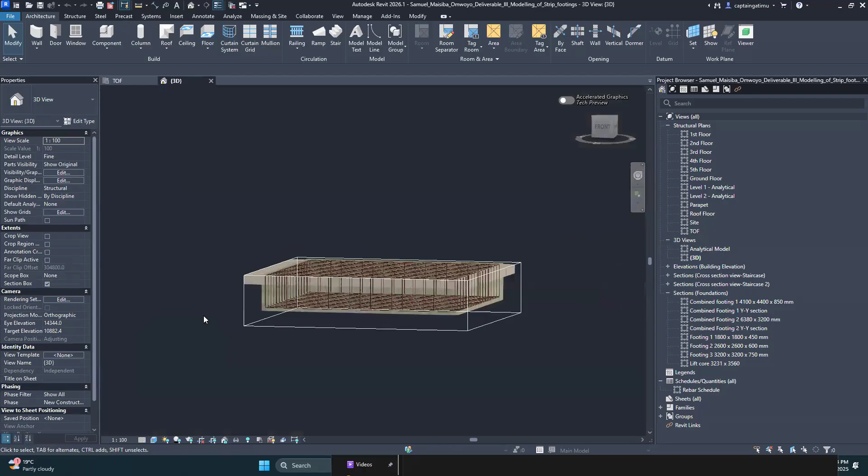Okay super, so this is what I want us to do. At the moment, we only have the structural model that we have all modeled, all right? So I can see some of us have already been able to create this section box. I want us to do this simple thing, I want you to be in a situation where you can visualize the entire structure in 3D.

If you had used the section box and you have been unable to go back into the entire 3D model, you can be in the 3D view first, press escape to ensure you have not selected anything. Then in the properties tab under extents, there's this section box, uncheck it, and your 3D view will reset back to the defaults. So this is what you're going to have.

Then after you have this, now we can link the IFC file. So we said the IFC file is an Industry Foundation Class. It allows you to move information or transfer information from various software, and it's a standard class that can be opened in all BIM software.

So it means you can move your data from Revit to another software that is not made by Autodesk. You can move data from, say, ArchiCAD, Tekla, ETABS into Revit as well using the IFC files.

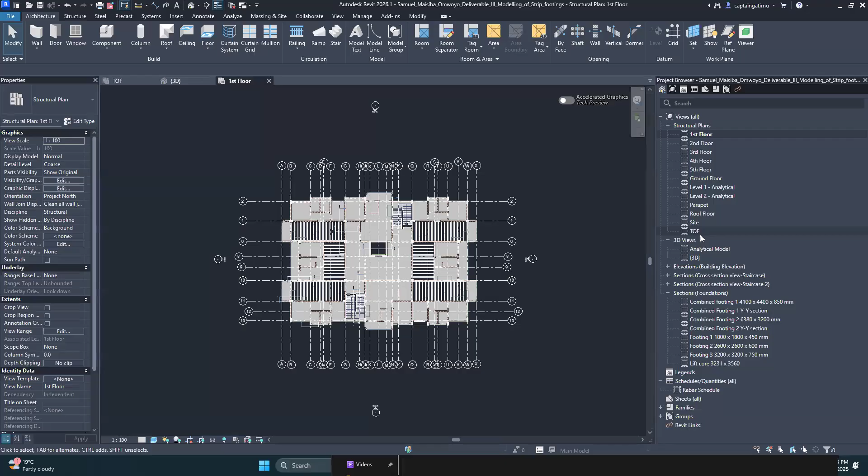All right, so with that done, linking the file should be easy. All you need to do is go to Insert, as we did for the PDF and CAD files before, then click on IFC file and scroll to where you have your file stored. If you don't know where the IFC file is, just use the link from which you downloaded the PDF files and CAD files; you should be able to find the IFC file there. So go to where you have yours stored, click on the IFC file and open it. At the moment, leave everything as default and give Revit a moment to load.

As you import this IFC file, take note of one thing: it is going to make your model really heavy. So I recommend that you just link it, move it to where we want to move it, and once you are able to visualize your model, unlink it from your model.

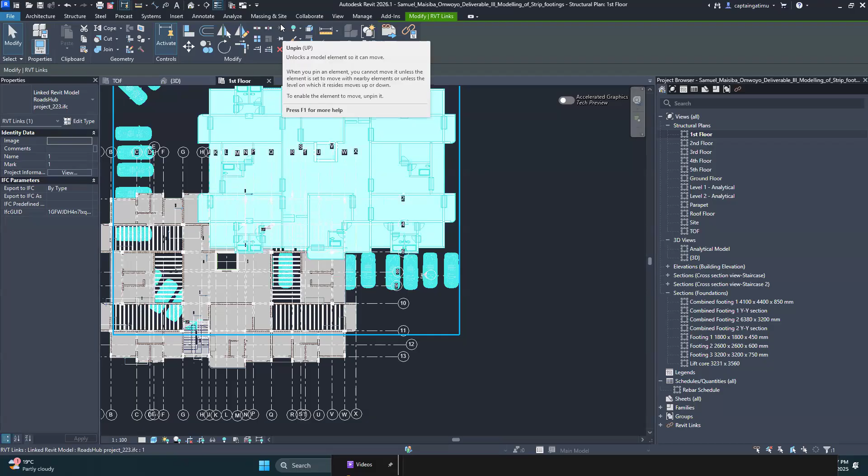After you've opened it, you're going to notice that it has not been placed on top of our floor plan as you would wish. So what I want you to do at this point is select the file itself. Remember, your software is going to be a bit heavy at this point, so just work slowly. Select the file itself and ensure it has not been pinned. If it has been pinned, you're going to have the option to unpin it, but if it's not pinned, you cannot unpin it, and this means you can move it. So move it by this corner here, and move it so that it flushes with this corner right there.

Okay, once you have your IFC file lined up on top of your floor plan, you can now go into the 3D view and be able to see how the architectural members are interacting with your structural members.

So in this situation, if you do not want your walls going excessively outside, you can take note of that and be able to change the position of your wall so that you can have what you need.

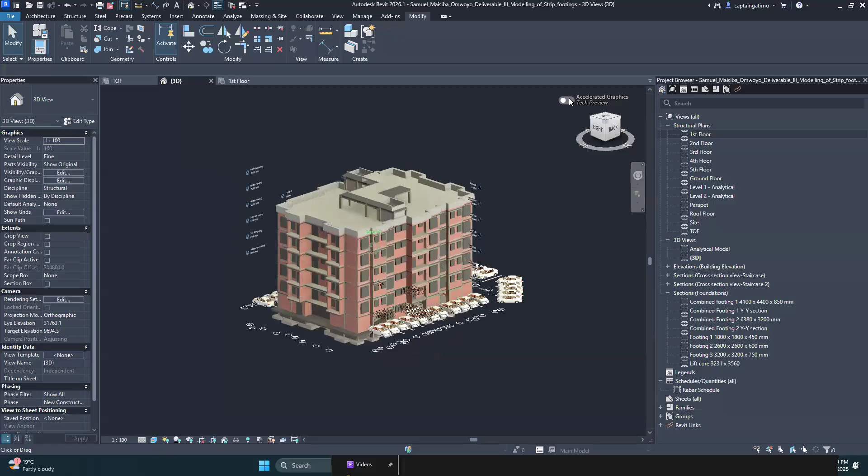Okay, so you can see the areas where we have modeled our cantilever slabs or our balconies, and you can see they are where they should be. So this is what you can generally use an IFC file for.

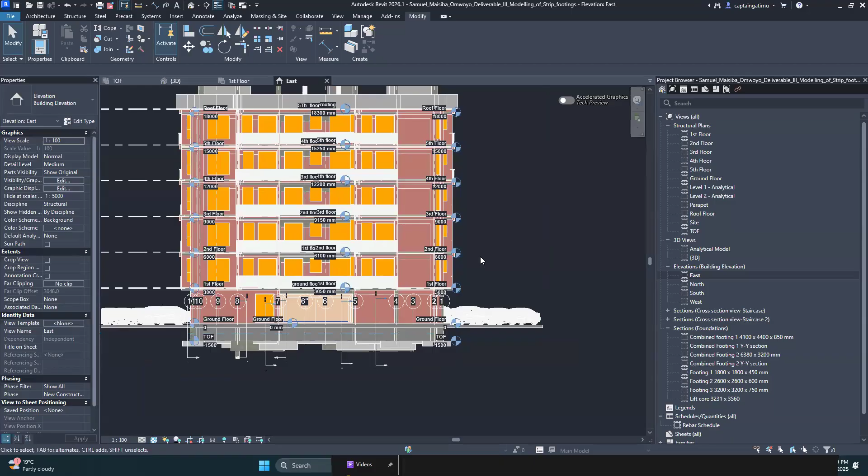You can be able to confirm any errors before you proceed. So if you go to an elevation view, take note of a few differences you may be having between your architectural model and your structural model. You must note that the levels vary a bit, but that is no cause for concern at this point, since we changed the levels as we were doing our work, and that's good enough for us. But in the eventuality that your levels vary by a big value, you can take note of that error and correct it before going further, so that you can save your energy and time later on.

All right, so you have this. This is how you do it, and I think it's pretty easy. So you can be able to model it and get to see how your members interact with the architectural elements.

All right, so I'll close this project and then open a project that I'm going to be using for today's demonstration. So just give me a moment as I close this and open a model that I'm going to use.

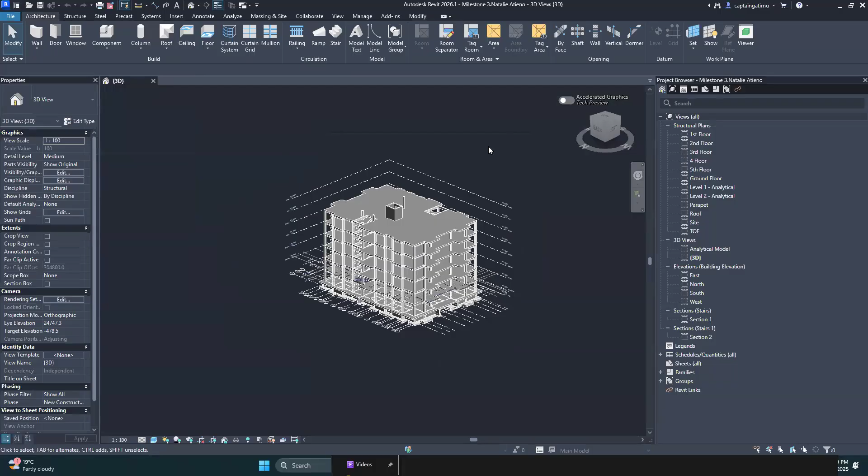Okay, I forgot to show you how to unlink it. So I'm going to do that again so that you can be able to unlink it as you work on it.

So we're going to re-import the IFC file in this model as well. We are going to go into the Insert tab, go to Link IFC, select the IFC, and click on Open. Give it a moment to load, and you'll have your IFC file within your model. You can change the graphic display option to shaded or realistic so that you can visualize it better. Then select your IFC file and use move to move it.

So I'm moving it by this corner and moving it to this corner here, so that it fits perfectly there.

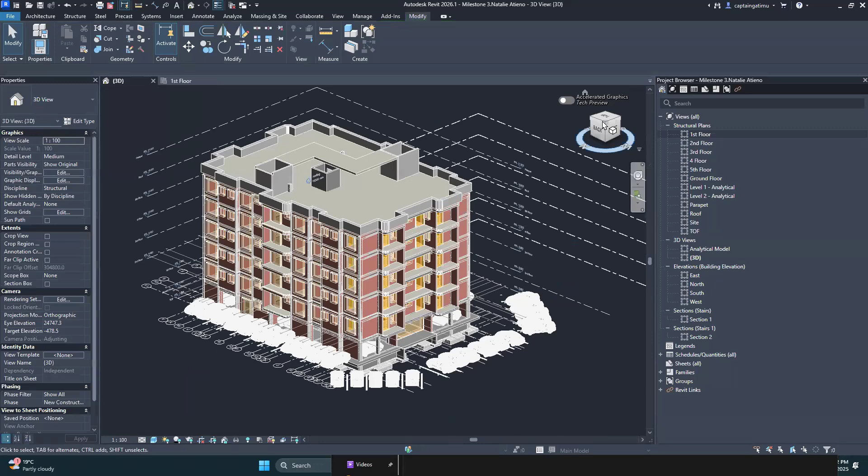Then after you do that, you can go to your 3D view and just have a view of how your members are interacting with the architectural members. For example, you can see here this should be the opening into the parking lots. So if you had a column here, you can tell that that system will not work for this particular design.

In the eventuality that you have linked your file into Revit and now want to remove it so you can proceed with other works, this is how you do it. You go to Manage, then Manage Links. Once you are here, you can see all the files that you have linked into your project. You just select it, right click, and unload.

I'll repeat that. Once you have had a good visual check to see how your structural members are interacting with the architectural members, you can unlink the IFC file. What you do is go to the Manage tab, then Manage Links, and at this point go to the IFC file - this is what we are interested in. Right click and then unload. Click on OK, and you are good to go.

Then also we do not need the CAD file at this point, so we can unlink it in the same way. You just right click on it and then unload it.

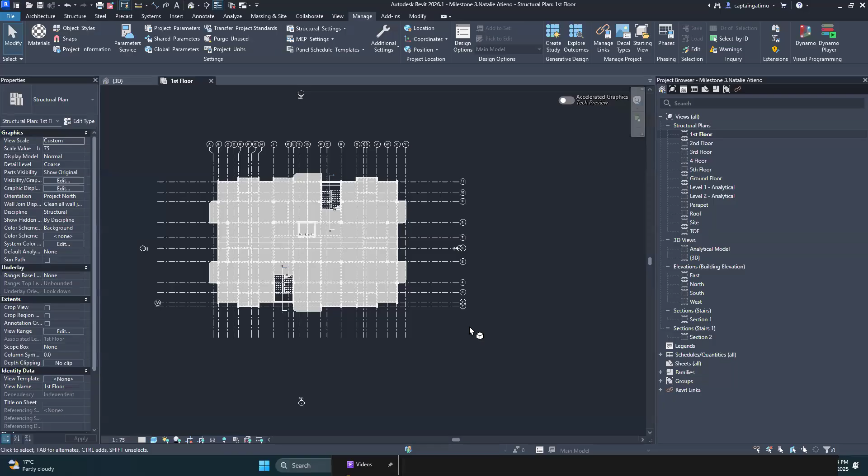After you have done that, you just close and you'll notice it now disappears from the model itself. Also, the CAD file that we had in our model has been removed. So that's how you are able to link files into your software, and that's also how you unload any links or linked files from the model if you do not need them.

Okay, so let's proceed. The next bit will be to create filters.

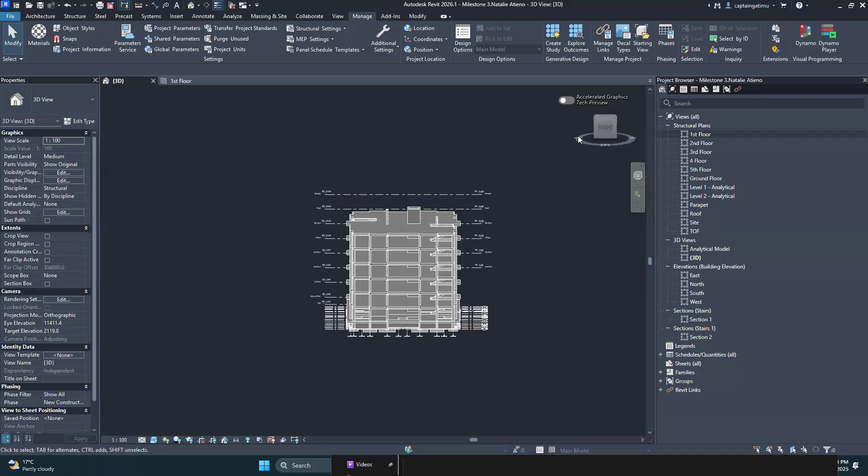So at this point, by modeling this structure, we have different cross sections of columns. We know we have 4 cross sections, but by looking at it from afar, we cannot tell where our column ones are, where our column twos are, where our columns threes are, where our columns fours are. We are not able to do that. But it would be good practice that as you look at your model, you are able to tell where a particular family is, so that if there was an error during modeling, you would not expect your column 4 or column 2 to be here as per your design - you can make those changes earlier on before you proceed with other works.

Okay, so this is how you create filters. To create filters, I'm going to take you back to the visibility settings that we have used before. The visibility settings are: one, settings that affect whether elements are visualized or if you cannot see them in Revit. Number two, they affect how elements are seen or visualized in Revit.

So these affect the cut patterns and the colors of the members themselves, and you're going to be able to see that. For some of you, your staircase are probably not visible in the 3D view.

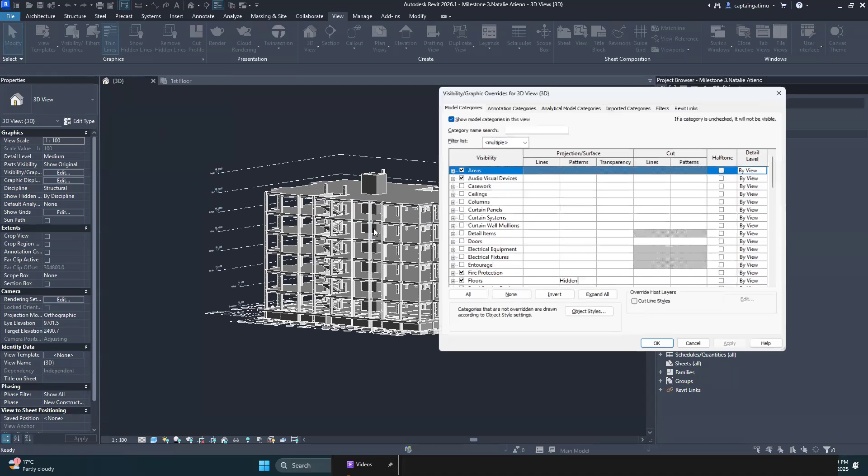So we are going to go to the visibility graphics. We said you could go to the view tab and click on visibility graphics, or you could just type VG and the visibility graphics dialog box will appear. Our interest is now in creating a filter, so we go to filters over here, and once we get to filters, we are going to create a new one.

So how do you create a new one? This is how: you go to edit/new at the bottom, left click on it, and then in the filters dialog box you get to this new icon. It looks like a page folded at the top right with a sun icon to its top left. Click on this and you are prompted to name your filter, so we could call this 'column one,' and then click OK.

After naming your filter, you need to set the rules that affect how your filter works. To understand what this filter is, you need to understand the visibility graphics - settings that affect whether an element is visible or not, and also how a member is visualized in terms of color, cut patterns, etc.

Once you have your filter created, the 'column one' here, you go to the filter list. Since all members we are working with are structural members, you can uncheck architecture and ensure you are remaining with structure only. Then scroll down and look for the columns.

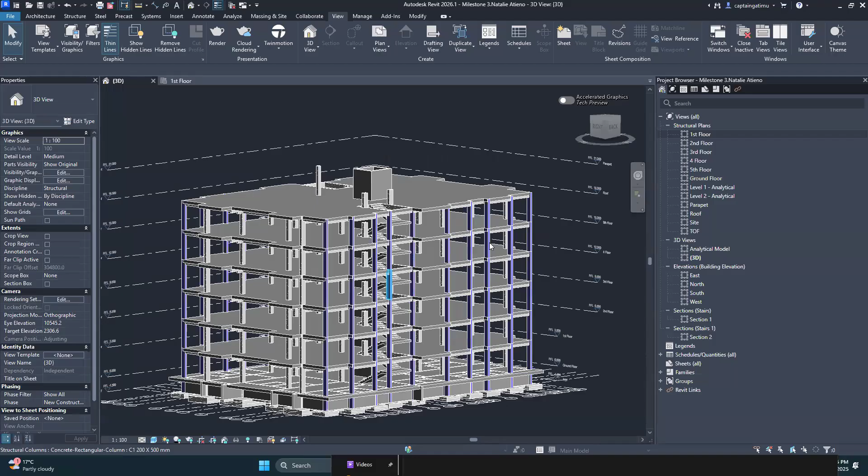From this view, you can tell that all our column ones have been given a specific color. So if you are working on your model and you have color-coded elements, you can tell which elements you are looking at. So if we had modeled a column one at an undesirable location, we can tell that earlier on, even before we get to the next part.

So I'm going to create filters for the other columns. To create filters again, we go to visibility graphics, and then under visibility graphics, we go to filters. Then to create a new filter, you click on edit, new. Then you add the new filter here. You give it a name first, so this is going to be column 2.

After you do that, now you have to select the category. The column is under structural columns, it's a structural column. So check structural column, and then you get to set the rules. We are using the type name. For this one, it has to be equals to, because it's a specific cross-section. Then you select the column 2 cross-section, C2, click apply, and OK. Then you add it, column 2, add it, and click OK there.

Then go to patterns, click on this override rectangle here, change the foreground pattern to solid fill, and enter a color of your choice.

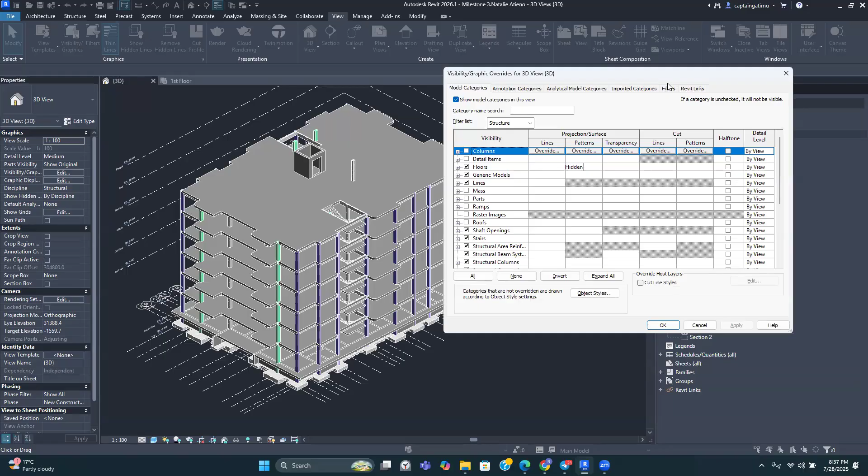I'm going to do the next one for column 3 and column 4. I'll be a bit faster on these two. To create the filters for column 3 and column 4, I'm going to show you a new trick.

Go to filters, then click edit, new. At this point, you're not going to create a new one. Rather, we're going to copy one. Go to one of the column filters we created, right click, and duplicate it. After duplicating, just rename it, call it column 3, then click OK. We don't need to select the category since it's a duplicate, it's already selected from our previous selection. Now go to the filter rules.

We don't have to do a lot here. All we need to do is click the drop down and select column 3. Click apply and OK. Then add it, column 3.

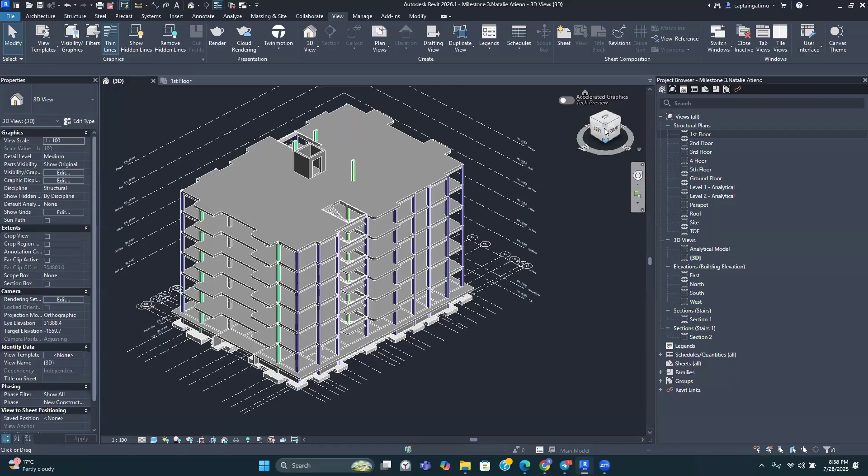You can change the pattern as we did earlier. The pattern foreground should be solid fill, and the color, select a color of your choice. I don't know what to go with, I'll just go with that. Click OK, apply, and OK. By doing that, you can see where our column threes are.

But the colors I chose for column 2 and column 3 are not easily differentiable. I'd recommend you go with colors that you can easily tell apart from each other.

So we continue: visibility graphics, filters, edit, new. We're going to duplicate this one more time. Let's rename this now, we rename it to column 4. Click OK.

Then just change the value to column 4. Click apply and OK, and then add it. After you add it, you change the pattern. Go to pattern override, change the pattern to solid fill, and then the color, you can change it to a color of your choice.

Which one do I go with? I'm going to go with this. Click OK, OK, apply, and OK. By doing that, you can see where your column fours are, and I think they are where I expect them to be.

The beauty of this is you can do this for all the members in this model. You can do it for the foundations, the slabs, the shear walls, the foundation walls, and the stairs as well. So I'm going to show you two more, and then we'll share videos to guide you on how to create filters for the other members.

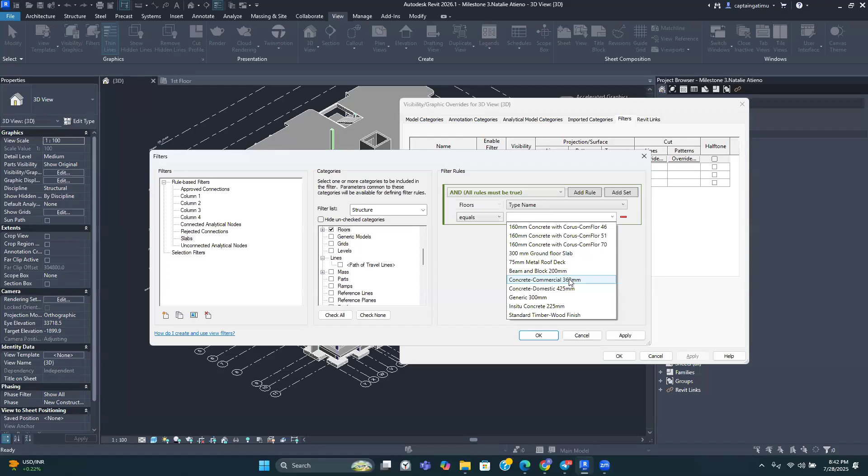Okay, so I think this poses a good challenge. If you are unsure about the names that you created or the type names that you used for your structural members, this is what you should do. Just click on apply, click on OK, click on OK again. Go and select one slab, and get to see which type name you used. So if you select one, go to edit type. This is what you are calling the type name.

So you can be able to see even errors that may arise. For example, you can see that Natalie used the same slab from the ground floor to the roof level, which is not ideal. So what we can do at this point is select this slab, go to edit type, duplicate it. Let's call it the 175 mm RC slab, and click on OK.

Whoever that is, Oliver. Okay, so just change the thickness to 175, click on OK, and you are good to go.

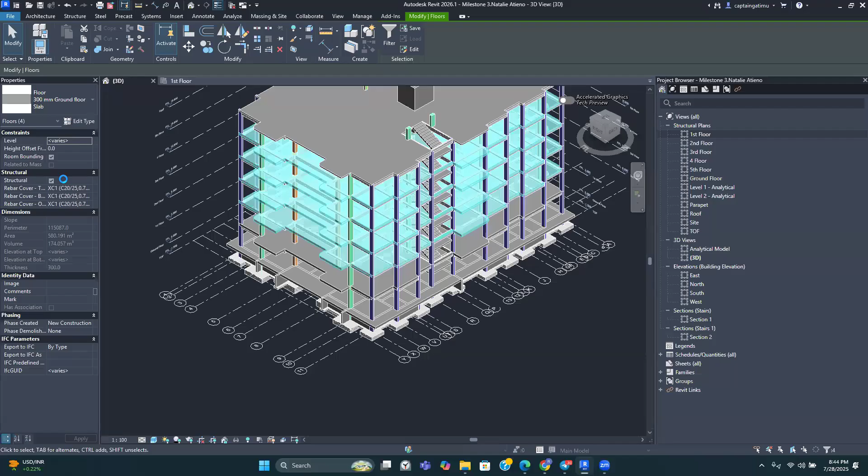So I'll want to show you something here. I'll just change a few over here, probably to that point. Then click on this properties tab and select the type name that I want, and then let Revit do the rest for me.

Okay, then I'll go to visibility graphics, go to filters, edit, new, and select the slabs. Go to filter rules, ensure first the category is under floors. Then in the filter rules, we're going to use the type name as the parameter, equals as the operator. And in the value, we are going to select the type name that we just created. Click on apply and OK.

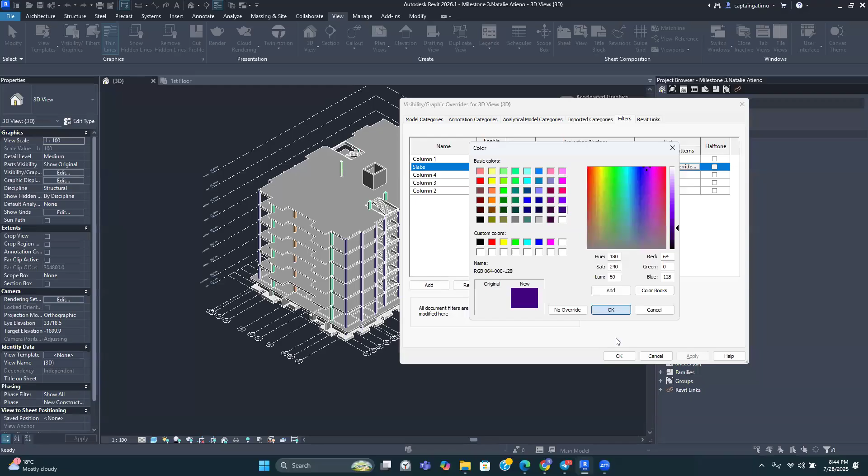Then I want you to see how this would help you identify errors earlier on. So if you were to give this a color, solid fill, let's give these a different color. So which color do I go with? I'll go with this. Click on OK, OK, apply and OK. That's too bright, don't pick that color please.

So you can tell that this floor is suspended, but it does not have the same type name as the other floors. So there must be an error here. You can visually tell that there is a family that is not at the right place, or it is not where it's supposed to be. This is why we work with filters, just to enable us to have a visual look or visually understand our structure better.

So I'm going to create the last one for the walls, and then I'm going to leave the rest for you to create, since they follow the same workflow. All right, so I'm going to go to filter. I want to create one for the walls. I'm going to click on edit, new, and create a new one here.

I'm going to call these the lift core walls. Okay, the lift core walls. And then under categories, you have to scroll and look for structural walls. You are going to find that there are no structural walls, just as there were no structural floors. So you will just select walls, scroll down and select walls.

And then in the filter rules, remember in the parameter we are using the type name. We are using the type name for now. And in the operator, we use equals. And in the value, we are supposed to use the lift core walls, or whatever name you gave yours. So I'm going to select the lift core walls, click on apply and OK. Then I'm going to add them, lift core walls, click on OK.

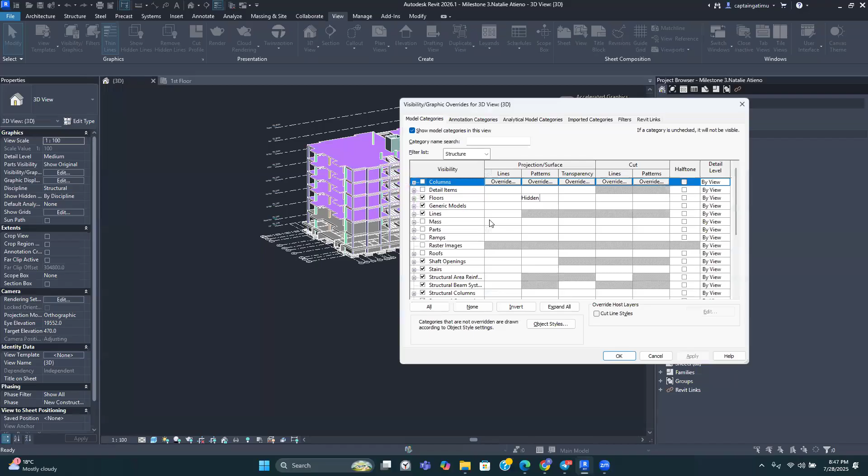All right, so that's how you create filters. And this is what they allow you to do. If you have filters, you can single out one element. So if I'm only interested in seeing my column ones, I can uncheck everything here. And if I had a filter for every element, I can uncheck all the other elements. I can turn off their visibility, click on apply and OK, and I'd be able to see my column ones only. If I wanted to do the same for the beams, you can do the same.

I hope that was understood. If you got that concept, please type a one. Let me know we are together.

Super. I can see most of us are flowing really, really well.

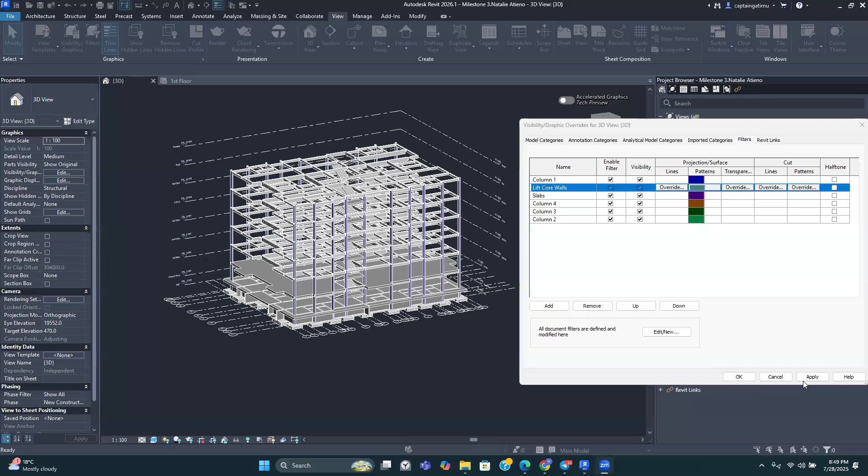So we are going to go back. In the eventuality that you have turned the visibility of some of the members off and you'd love to visualize them, you just go to visibility graphics again, filters, and check these checkboxes. Click apply and okay, and your members will reappear again.

So those are some of the things that we use to make our work easier in Revit, especially when working on larger projects that might be a little complicated to work with when visualizing everything in one view.

And the beauty of this is it will also be applied to the rebars, especially when you get to modeling rebars for the slab. We are going to create filters for each layer, be it the bottom ones, bottom twos, bottom threes, the top ones and top twos, so that when doing our annotation it becomes easier. We can work on one set of rebars first, then once done, turn it off and shift our focus to the next set, ensuring it's easy on our eyes to work on.

So with that, we are going to go to a new concept, and the new one we're going to be working on is modeling the rebars.

But before I go there, I wanted to challenge you guys. I know at this point you have enough knowledge to model the parapet level. We just need a floor, the columns over this section to cover the staircase, the shear wall itself, and this other staircase. I know at this point you have the knowledge to do that. So I am hoping you will take that as a challenge and model the parapet floor on your own.

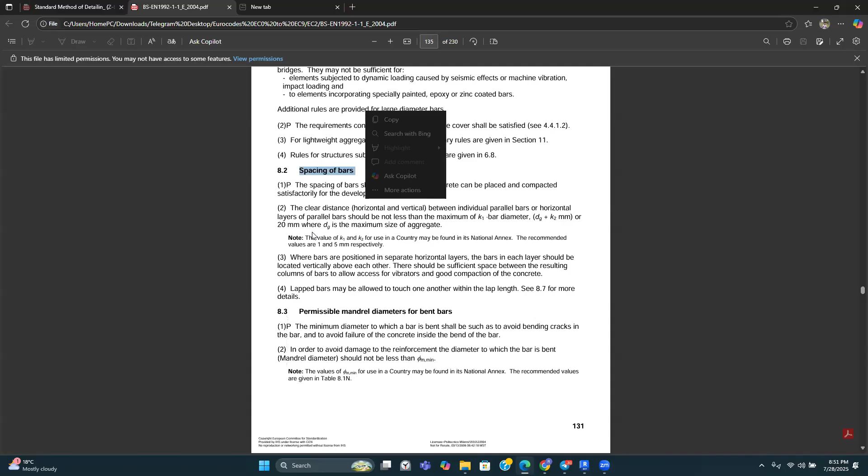And the most important thing you're going to be reading here is about the spacing of the bars. We are not going to, at this point, focus on what the annotations should show. Once we get to annotation, we are going to be able to do that. So what I want us to do is just get to see the guidelines specified for the spacing of bars in individual members.

The spacing of bars shall be such that the concrete can be placed and compacted satisfactorily for the development of adequate bond. This means once you pour your concrete on site, you can compact it - the vibrator can go through the different layers of bars so that you can develop the adequate bond between concrete and the rebars themselves.

Sometimes you're going to find structures that have too many bars, and you're not able to meet the minimum spacing between bars, which typically should be equal to your largest aggregate. So if your largest aggregate in your design mix is 25 millimeters, it means at any point when doing your design calculations, you should always ensure that the minimum distance between any two bars is 25 mm.

If you do not meet that requirement, design-wise, you'd have to come up with a different design, probably work with a higher class, or even go for some novel solutions, like self-compacting concrete, but that would be really expensive. So you have to balance everything to keep it economical.

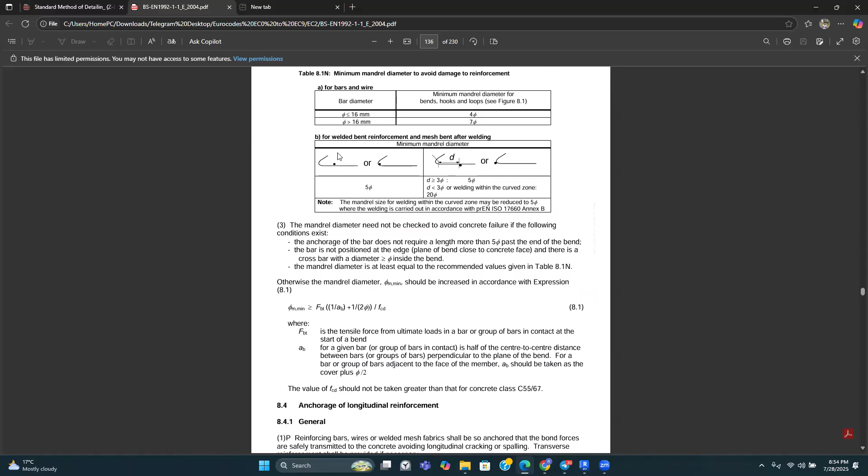The other important thing we have to look at is the bending diameter, since we are going to be bending our bars. Looking at the standards of detailing, this typical cross section has a bend here, and the diameter of that bend is what they refer to as the mandrel diameter.

There is a minimum diameter you have to use. These are not things you'll definitely measure on site, but it's good to take notes so you ensure you do not degrade your rebar while cutting and bending on site. For any bar diameter less than 16 mm, the minimum mandrel diameter for the bend must be 4 times the diameter of the bar. If the diameter is greater than 16 mm, that bend diameter should be greater than 7 times the diameter.

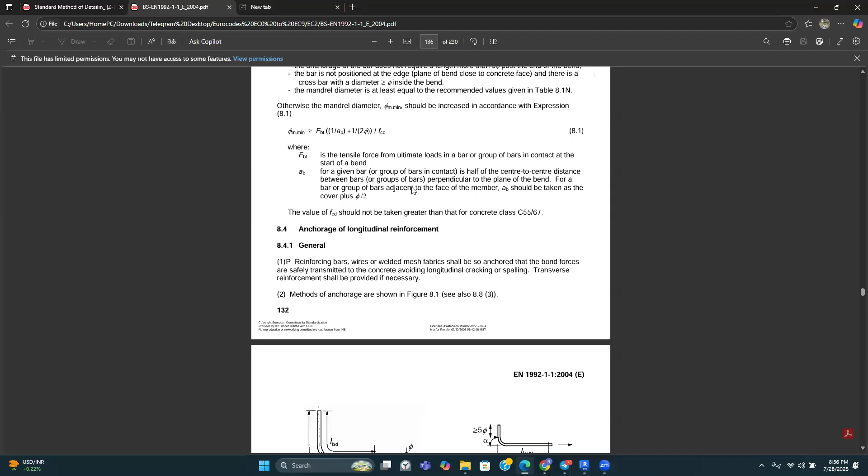But again, this is not something you'd really need to be keen on at site, because it's relatively easy to achieve. So that should not worry you at all.

The other one is with regards to the length of the hook, since we are going to be creating hooks for our bars. For the 90-degree hook we're going to use for our foundations, this length above the mandrel should be at least 5 times the diameter of the bar, so greater than or equal to 5 times the diameter.

So if you are using a 12 mm bar diameter, this length should be at least 60 mm going upwards. If you are catering for this length as well, it would have to be relatively greater than 60, just to be safe. So we are going to use that information.

At least we now have a background, and we are going to start modeling the rebar, beginning with the foundations, just to start off, because this offers a softer launching pad. As the course continues, you'll move on to more complex members to model rebar for. We are going to work in the top of foundation, starting with the easiest one, footing 1, then proceed to the other footings and one of the combined footings together, and we'll provide recordings for you to do the other one as practice, as part of the milestone.

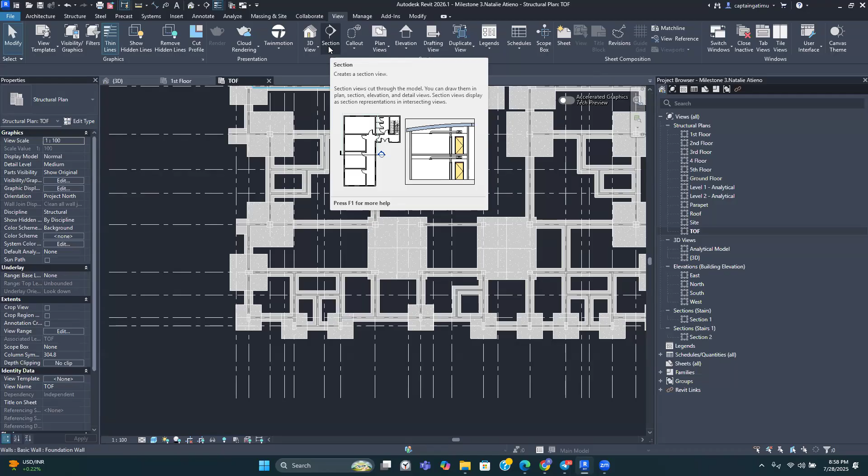So that you can be able to transfer those section views to paper space easily, you're not going to be doing any drafting later. These are the details that we are going to export into the paper space later on.

All right, so we are going to start with the foundations. To create a section view for the foundations, you just go to the view tab, select section, click on this drop down, select the cross section, click on edit type, duplicate it. Always ensure you duplicate it first, and then create a section for the foundations. After you create it, click OK, and you can place your section over here.

Just place it across the foundation, and then minimize the depth so that you can only see what is necessary. All right, sorry, please let me turn this off. Okay, sorry for that. So we are going to proceed to model the rebar here.

So at this point, if you go to the views, you can be able to see the sections that we created for our foundations. You can also see the section for our stairs, and this is how it makes your project browser a bit orderly. So if you wanted a section that pertains to the foundations, you definitely know where to get them.

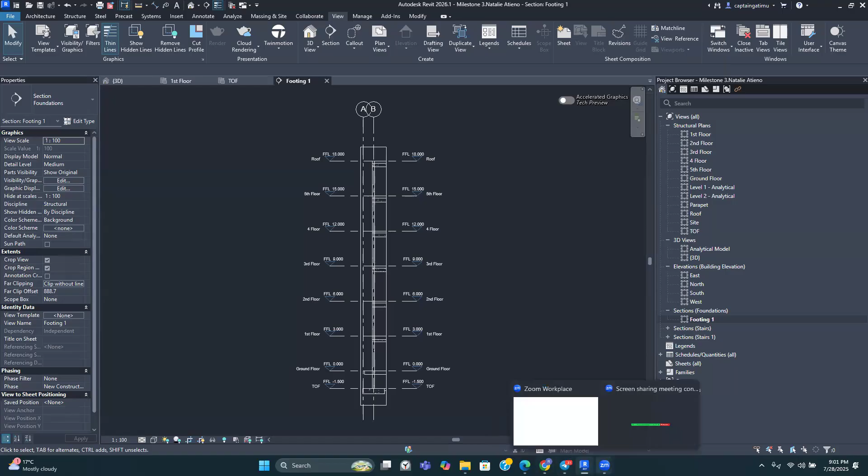All right, so at this point, we are going to now model the rebar here. But before we do that, we need to ensure that this view is a bit presentable and that it's easier to work with. One of the ways in which we can do that is working with a scale. We are going to work with a larger scale because this is a smaller section, so we're going to change the scale to 1:50.

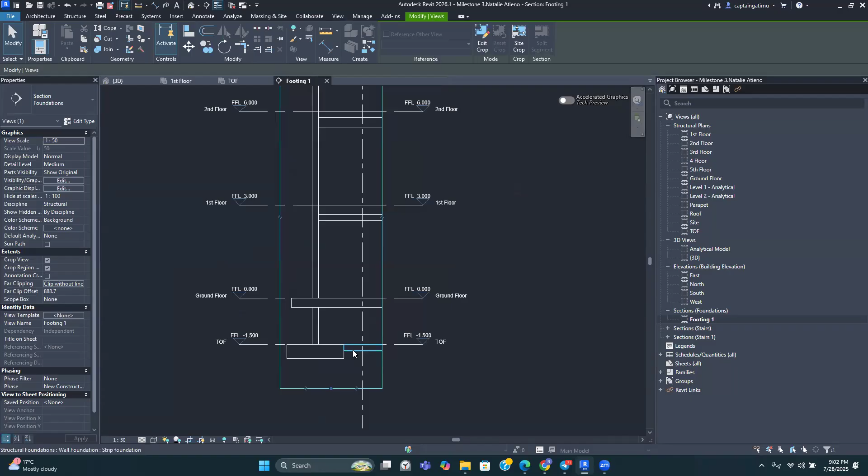After we do that, I want you to select this grid here and this one. We do not need them at this point, so we can hide them. Then I would like to show that these elements over here are continuous. So for the ground floor slab, you'd want to show that it is continuous and that it does not end at this point.

So what we usually use is a component known as a break line. This is how you get to insert that component. You go into the annotate tab, click on components, and then you load the family.

After you click on load family, click on this drop down, go back to libraries, click on English, select UK, then scroll down and look for annotations or detail items. Look for detail items, and then left click twice to open it. Then left click on annotations and select the detail item break line. After you have this, click on open, and it has been loaded into your project.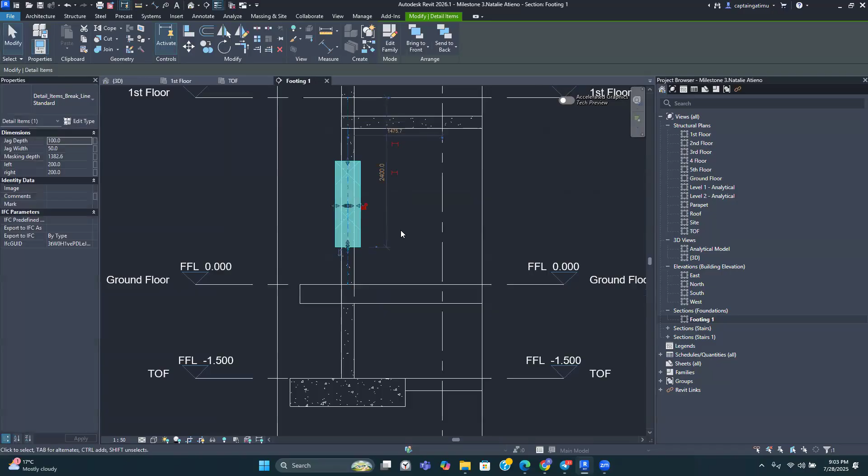At this point, you can place it and extend it upwards just to show that this column section over here continues upwards. Then we can add another one here, and let's add another one here, and show you how to hide the strip footings as well.

Don't delete anything. Something that I cannot overemphasize is that you should not delete anything haphazardly in Revit. Just hide it in case you aren't sure if you need it in other views, because if you delete anything in this view, it is going to be applied throughout the entire structure. So let me hide this grid as well. You just select it, right click, and then hide in view.

So we want to break this slab as well. What we do is go to annotate and then components. Because I've already loaded it, it is going to appear here, so you don't need to load it again, but for the purposes of reinforcing what we just did, I'm going to load it again. Once you get to annotate, select components, go to load family, click on this drop down, scroll back to English, select UK, then scroll down and look for detail items.

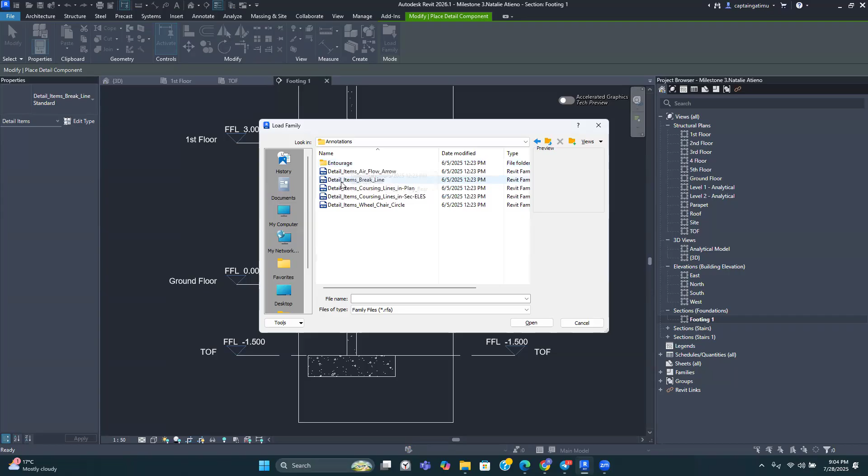After you open detail items, you select annotations, then select the detail items break line. Click on open and place it here.

At this point it is horizontal and you might want to change its orientation. We change its orientation using the space bar. So if you'd like to change how it's been oriented, you just click on the space bar and Revit will reorient it. Then you place it.

Sometimes it is placed viewing the wrong direction. At this point we would want it to go outwards, not inwards. So you just select it. We have this flip instance over here. Select it, then left click on flip instance, and you're going to have it there.

Then you can move it, move it inwards a little bit, and you are good to go. So this is how you do it, and then there are more edits you can make to it. You can extend it if you want, or just move it if you are not pleased with where it has been placed.

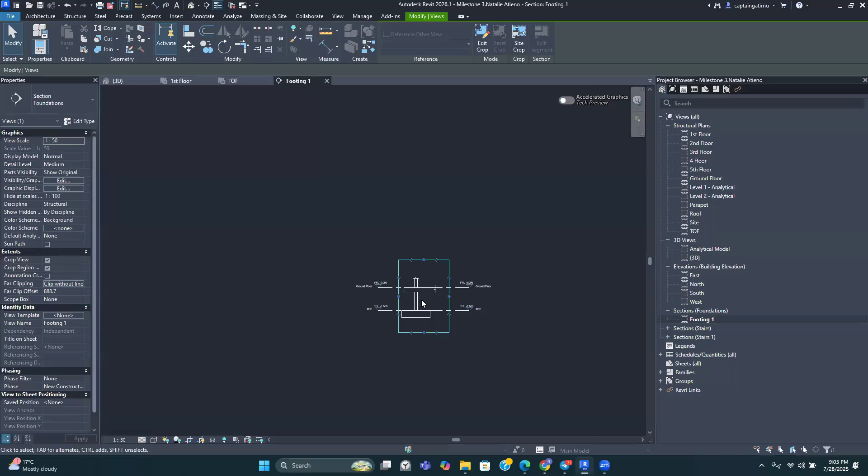That's how you do it, and then also ensure you hide these walls. Then just bring these, click on this rectangle over here and bring it downwards, so that you have a section that you are going to use now for our details. You're not going to be making other details. This is what you're going to transfer to the paper space.

As we said earlier, we are not going to be doing any annotation. We are going to be modeling the members in 3D, and that's what you're going to transfer into the paper space. Then now, after we have this, we can be able to model our rebar, since this is a bit clean.

So what you're going to do to model rebar, you go to the structural tab, and then you're going to be working in the reinforcement panel over here. The first thing that you're going to do before you place any rebar is provide cover for that particular element. So we're going to provide cover over here.

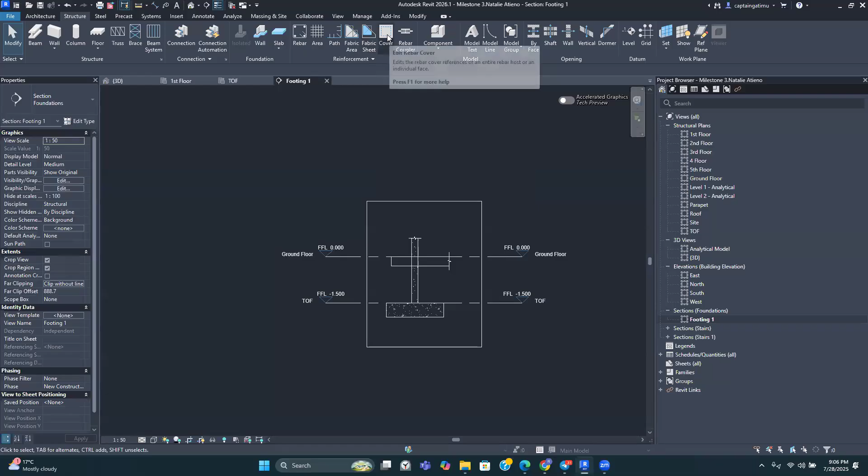You left click, and then you select the family you want to provide cover for. So you select the footing, and then you click on these three dots so that you can create a cover that you want. You can use these pre-existing covers, but since we would like to add our own new cover, you just click on add, and then go to the rebar cover that has been added.

You can call these foundations. Then for the foundations, you're going to use a thickness of 50 mm. So you just enter 50, click OK, and then select your footing, click this drop down, scroll up, and select foundations there.

And your cover has been modeled in Revit. So what that cover does is that Revit understands that you're providing a clear cover for your foundation, a specific thickness of concrete that you do not want your rebar to go beyond. So as you model your rebar, it ensures that it is modeled constrained by that cover.

After you have your cover modeled, now you can model rebar. To model rebar, you just click on escape, go to the reinforcement panel over here, and left click on rebar. You're going to get this warning. Just click OK and proceed.

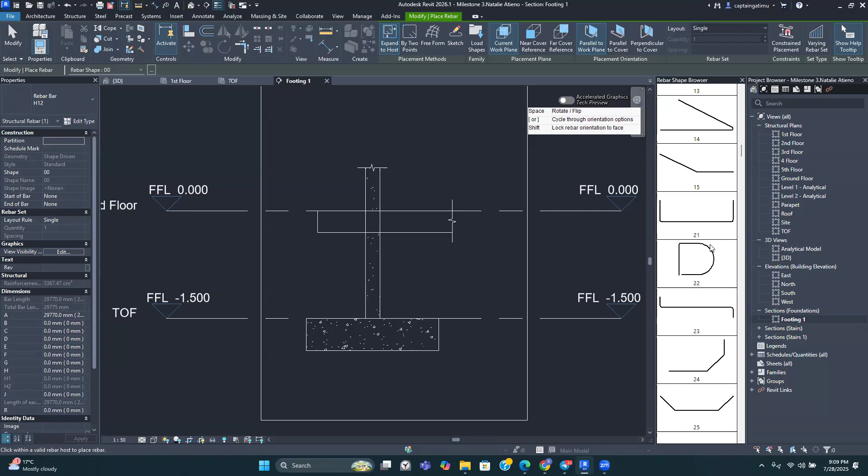The new pop-up on your right, the rebar shape browser, shows you the various shapes of reinforcement families already in Revit, all the families in your Revit templates. If yours does not pop up, all you need to do is click on these three dots, and it's going to pop up. Then in the contextual ribbon we have the various placement methods.

So we can model expand to host, by 2 points, freeform, or sketch. You're going to use expand to host most of the time. Then you're going to use by 2 points when you are going to be modeling rebars for the shear walls.

You're going to use freeform. You can use freeform for complex geometries, but for now you're not going to use that. Then sketch, you can create sketch when you have a very unique shape for your rebars.

Then we have the placement planes. You're going to stick with the current work plane, so you're not making edits to this. But for the placement orientation, you are going to make changes, since this affects how our rebars are modeled with regards to the section you are viewing. Do you want your rebar to be modeled parallel to the work plane, or across or perpendicular to it? You're going to see how that works.

You'll also notice that the properties panel changes, and it now contains constraints that pertain to rebar modeling. All right, so let's get started with rebar modeling.

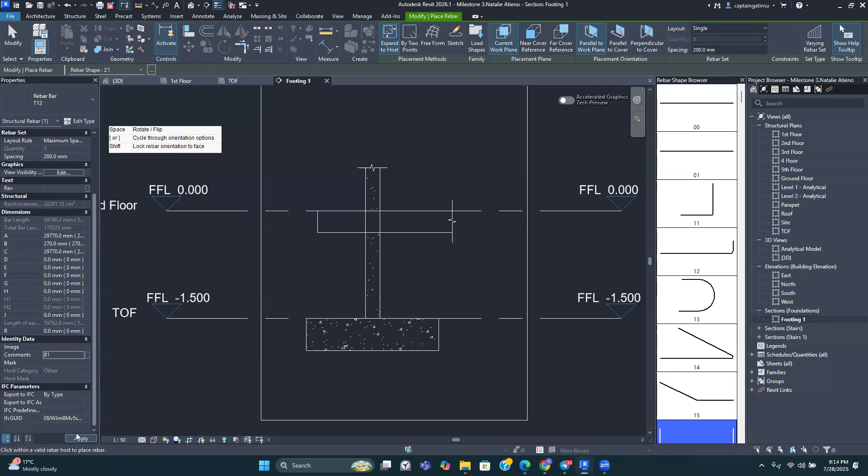For this one, you're going to start with the bottom one bar and click apply. The bottom one bar refers to the first bar you encounter as you approach this foundation from the bottom. So the first bar you encounter is your bottom one bar. After you have it modeled, just press escape, and you have your bar here.

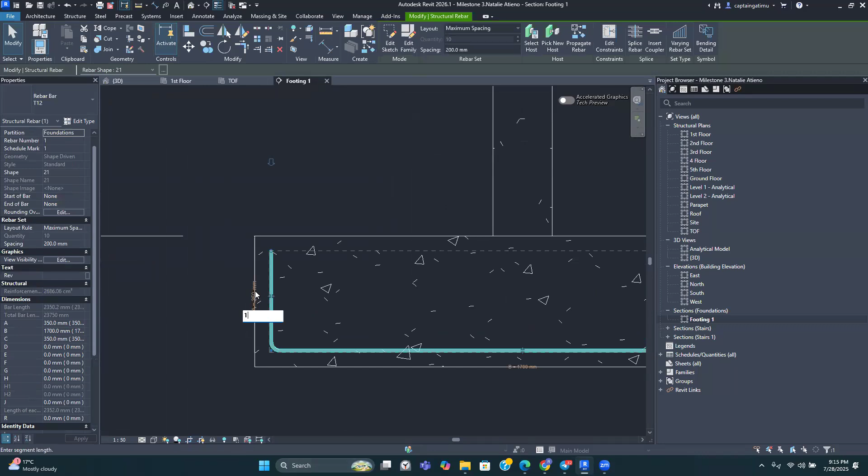Now you can model the bottom two bars running across this section. But before we do that, let's change the hook length. Select the bar itself, click on this dimension, and remember the minimum should be 5 times the diameter of the bar. So we can enter 150, which is sufficient for this particular footing.

This time we select placement orientation perpendicular to cover. Whenever you want to model bars running across the view you're in, like this bottom bar, you select perpendicular to cover. But if you want them running in the same direction as your view horizontally, you use parallel to work plane. So we switch to perpendicular to cover.

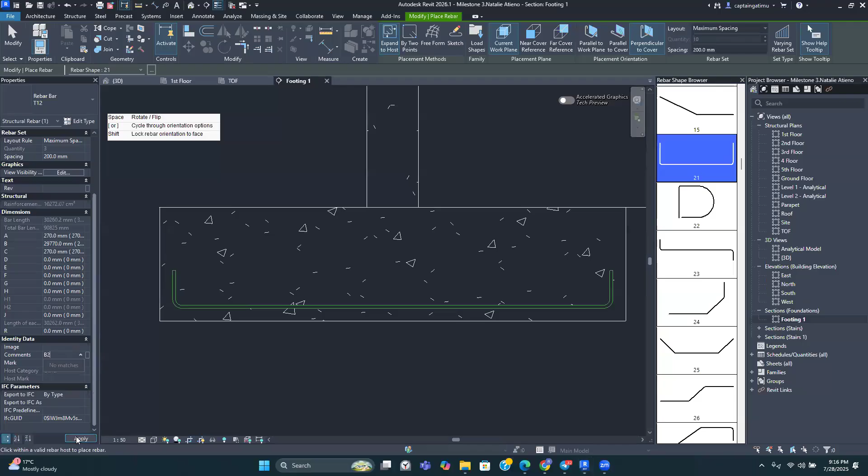Ensure the diameter is correct, T12. The partition is foundations, layout rule is maximum spacing, and the spacing is correct at 200 mm. For the comments, enter 'bottom two' so it communicates correctly.

Just place your rebar there and press escape. After modeling, select the set you just made and move them upwards so they're above the other rebar. With the bars still selected, go into the properties tab, change the A length to 150 as you did for the other one, and also change C to 150 just the same.

So that's just to show you that you can make the change using this parameter here, or you can make the change in the properties as well. You can see A and C here. We edited those values for these bars because we can't access those legs in this view, so we select them and change their properties from the properties panel.

And that's how you model your bars. Revit is able to count for you the number of bars that you need. So that's how easy it is to model rebars for a particular member. Now I want to show you something really cool.

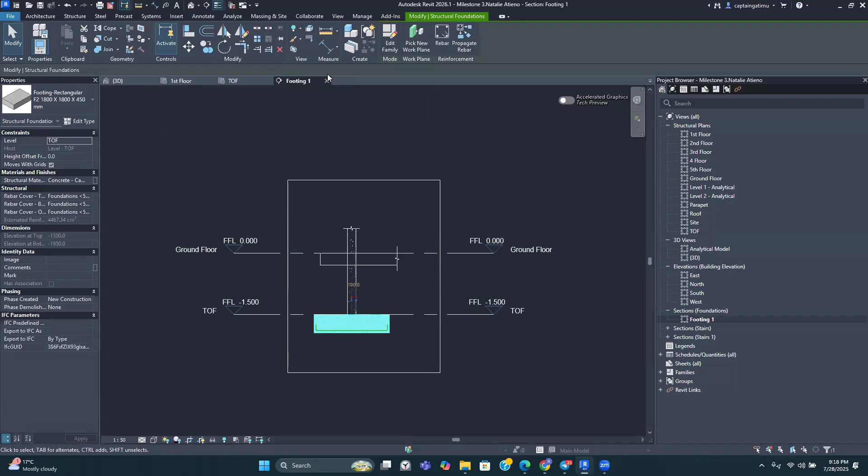You might want to see this in 3D. You can use the method we've been using: select the footing and go to the 3D view, and you'll be able to see your bars there. We can change this to realistic, and you can see your bars there. That's one way you can do it.

The other way is to create a specific 3D view for this section you just modeled rebar from. Go to the project browser, right click on 3D, and duplicate the view with detailing, then rename it. We can rename this to footing one. You don't need to do this for all the footings; this is just to show you that you can do it, so in case you need to view a certain element, you're able to.

After that, come to this icon here, and as you move your cursor along it, you'll see this arrow that stands for the context menu. You have to be in the 3D view you duplicated, move your cursor along the menu, left click, and scroll down to orient. You can orient this 3D view to a view, a direction, or a plane. We're interested in a view, so place your cursor on orient to view, scroll down to sections, and select footing section one.

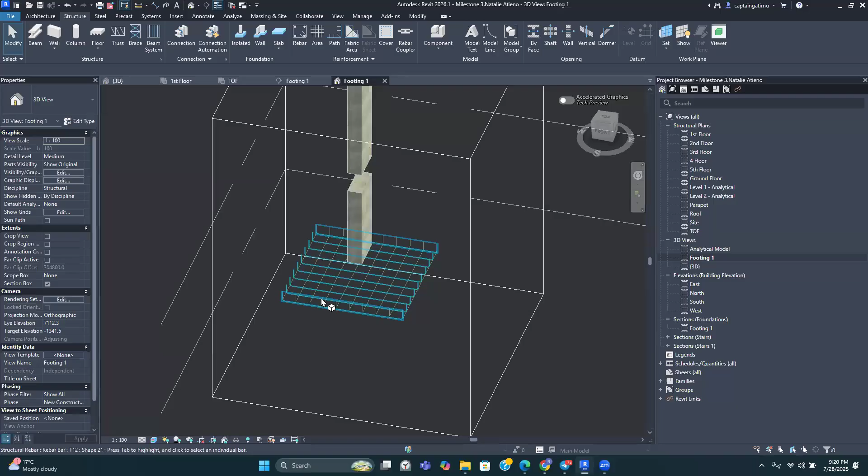So I'm going to select the rebars and select this footing and just hide it in view for now. You can be able to see your rebars there, so you can see that Revit was able to model all the rebars for you. I wanted you to see that in 3D.

Okay, so I'll go back to modeling so you can get a better understanding. We've modeled rebar for one footing. Now we're going to do two more, one for this footing, and another for these combined footings.

We're going to go to this footing, go to view, section, as we did. Don't create a new section, just use the foundation sections you created earlier. Place your section across it, bring it closer or reduce its depth, and click outside.

Then go to your project browser, and under the foundation sections you can see all your sections coming over. Select it, right click, and rename it. Rename this one to footing one, and this one to footing two, and you're good to go.

This is the importance of naming them as you go. It ensures your drawing or model remains clear. It's important to ensure your model is very clear so that when it comes to plan and production, you're not confused or it doesn't become unnecessarily tasking. If named correctly, you can tell which section you've printed and which one you haven't.

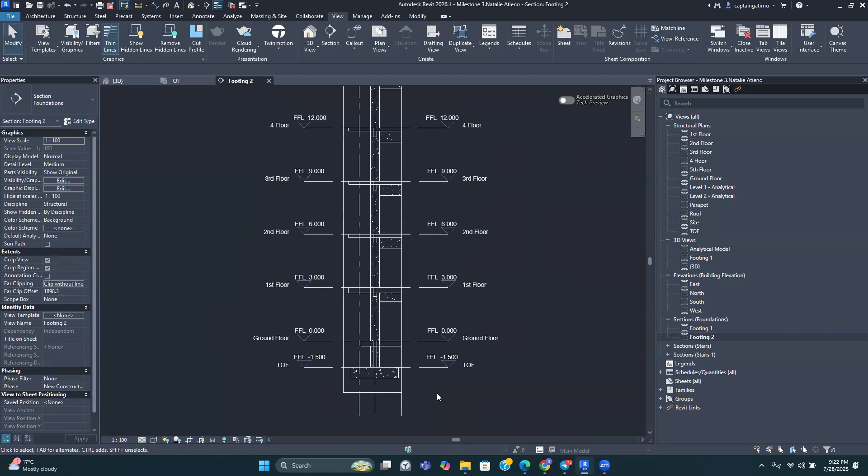So after you've named it, left click on it twice to open it. Then change the scale to 1:50 or something friendlier, and do the necessary.

The first thing you're always going to do is clean it up. Select these grids, they're not necessary, and hide them in view. Then please ensure you hide the wall as well, it tends to get forgotten. Select the wall, right click and hide it in view. Hide the strip footing as well, hide it in view, and hide the wall as well.

So if there's a column or a wall you don't want, just hide it in view so that your detail is a bit clearer to see. Then after you have that...

Please provide the annotation, the break line, to show that these members are continuous—you're just not showing the entire member. To provide the break line, go to annotate, components, and if ready to load it, go to load family, click the dropdown, scroll to English UK, scroll to detail items. Once at detail items, open annotations and select the break line. Click open, and now all that remains is placing it.

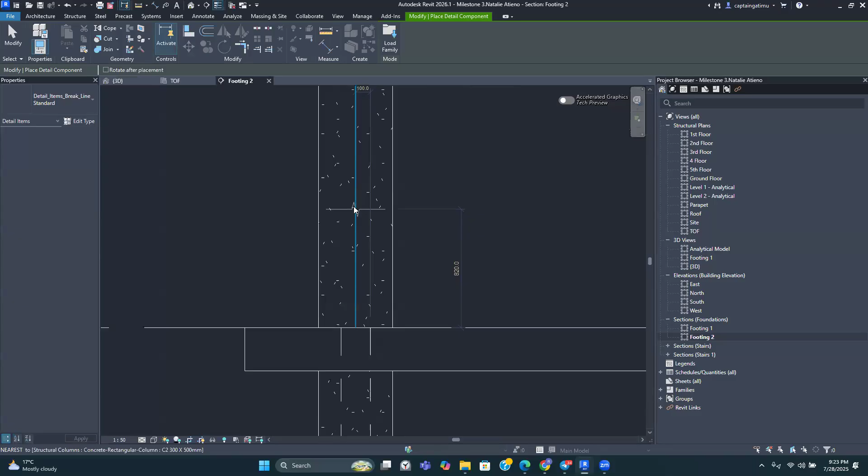Place it and use these grids to ensure it covers your member well, or hides the unnecessary items. Then extend it upwards.

Then place it on the slab as well. This slab is continuous and we want to break it at this point. You can change the orientation of this break line by clicking the space bar. Change the orientation and place it there.

After it's been placed, select it and make a few edits so it appears as you want it to. I think that is good enough.

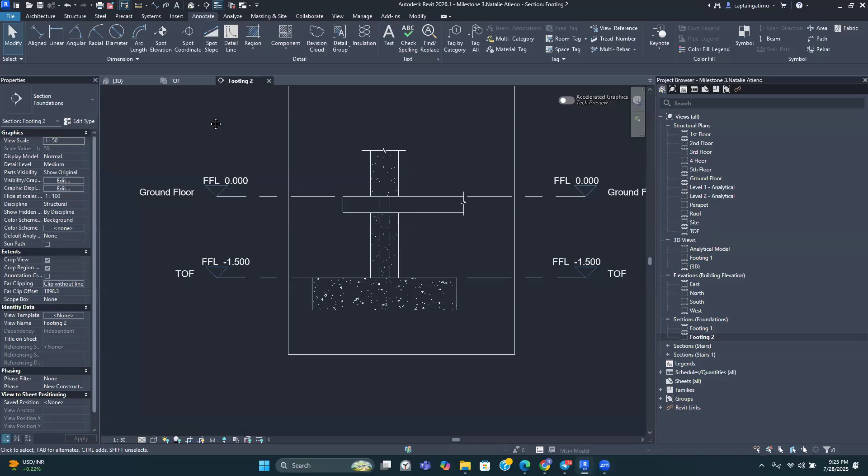Then select this section view boundary, and use this circular grid to bring it down so you're only viewing the section you want. I'm going to bring it to that point, and this one to that point, and you're good to go. All right.

After you've placed your break line on both the columns, the beams, or the slab, the next part is to ensure that the section view only shows you the detail that you want.

After that, provide cover. Please don't forget to provide cover. So you go to structure, cover, and click on the foundation. Since you had already created the cover before, we don't need to create it again. Just select your footing, click on the drop down, and select the foundation's cover you created earlier. After that, you are good to go.

Click on escape, then go to Rebar. The first thing you're always going to do is select the shape that you need. For the footing, we are using shape number 21. Then you're going to start modeling the rebar.

The bottom one is going to be parallel to this work plane, going horizontally. Let's equate horizontal to parallel to work plane, and the dots to perpendicular to cover, in this view. So we want the horizontal bars here.

Click on parallel to work plane and ensure the properties are right. We are using the T12 at this point. The partition is foundations. The rebar set affects the number of bars that are modeled.

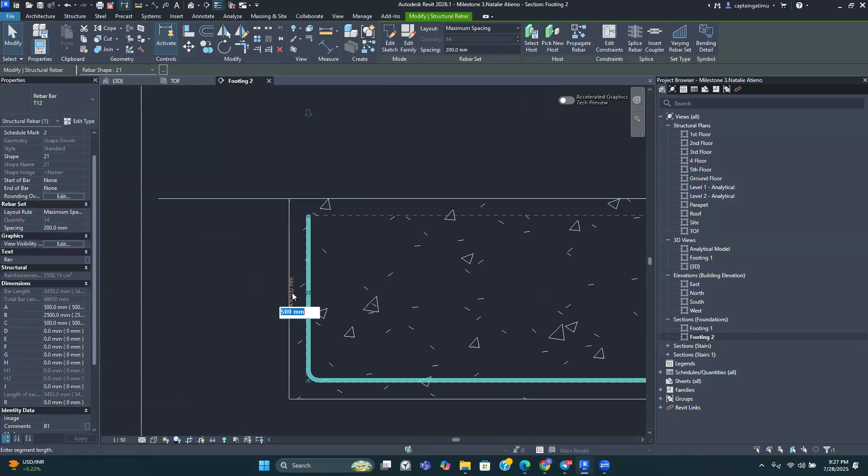After you do that, click on escape, select it first. Please ensure, if you're not sure about the comments, select the rebar again and ensure the comments are visible. Then change this A value - let's use 500 for this one, and 500 for this one as well. And we are good to go.

Now let's model the other bars, the bottom twos. To model them, go to Rebar. Since they are dots, we equate the dots to perpendicular to cover, so select perpendicular to cover. Ensure the bar size is 12 millimeter for this particular footing, the partition is foundations, the layout rule is maximum spacing, and the spacing is 200 mm.

For the comments, change this to bottom two, and click on apply. After that, just place your bars and you're good to go.

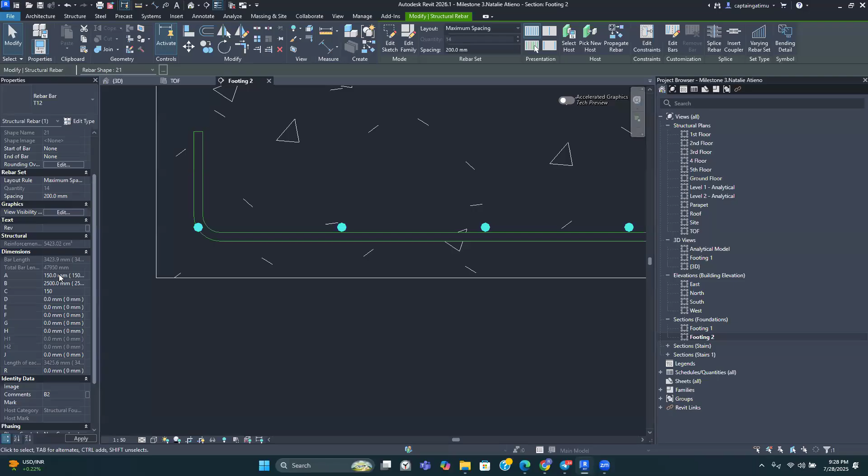Then select these bars and move them upwards, ensuring they lie on top of the other bar. With these bottom two bars highlighted, go to the properties panel, change the A value to 150 as we did for the other bar, and the C value to 150 as well. Then click on apply and you're good to go.

So that's how easy it is to model rebars for this footing. I am going to go to the next footing where we have both bottom bars and top bars for the footing itself.

Let's do that. I'm going to close this section at this point, and then I'm going to click on view, section. Sorry, before I go on, I'd like someone to unmute and just tell me the general order or flow we are using to model the rebars.

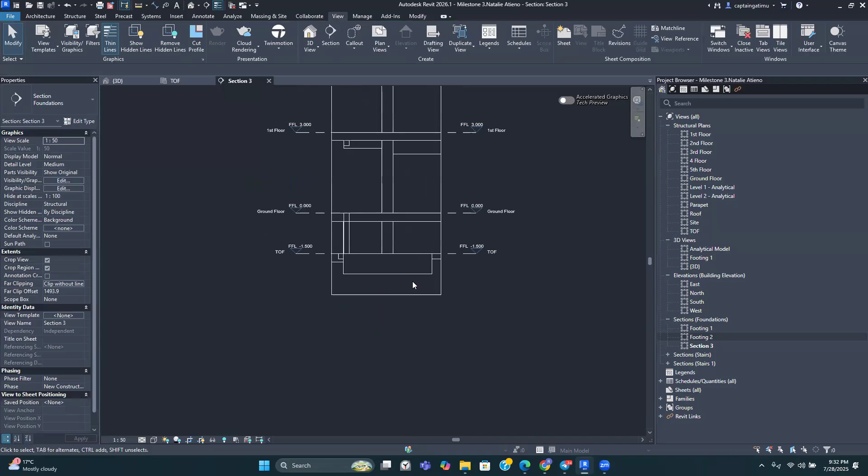For the walls and other foundations that are not necessary in this view, select them and hide them in view. Be patient with this. Always ensure you hide the walls too, they tend to get forgotten. Just select them and hide them in view. After that, you can expand these a little bit.

Now you use the break line. At this point, I'm not going to load it again, you only need to load it once. Then you just click on component over here and it's going to be there. I hope that was clear, you don't need to keep reloading it. You just load it once and it's there for your use. Ensure it's been placed correctly, then click on component again.

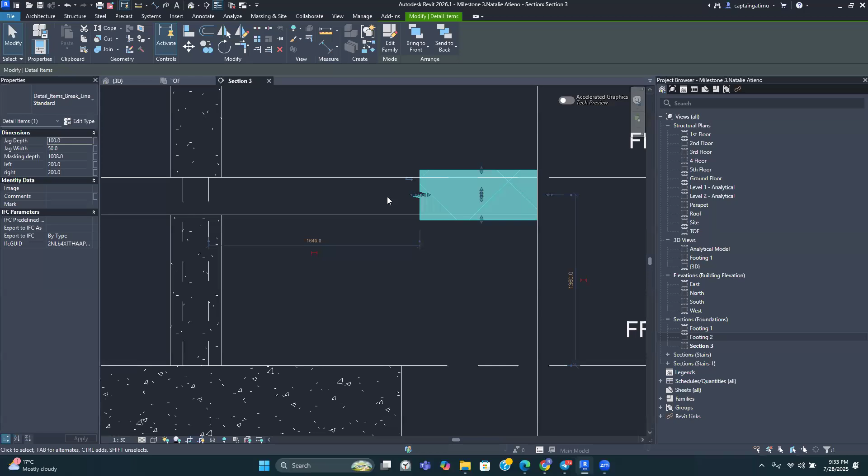For the slab, use the space button to orient it properly and then expand it. If you want to flip it, we have the flip symbols over here, so you can always flip it. After that, select this rectangle or viewport and ensure it now only focuses on this part over here.

After you have this, the next thing to do is model the rebar. But before you model the rebar, you have to provide cover for this footing. So you go to structure, start with cover. We had created the cover before, so once you click on cover, just select your foundation, click on this dropdown and select the foundation itself.

With that done, now go to rebar. For the footing, we said we are using rebar shape number 21. Since this is a horizontal bar, the bottom one bar, we are going to use parallel to work with. At this point, I'd like to use the T16 bar, so we click on this dropdown.

We are not interested in changing the diameter or the value of the diameter, only in changing the type name. So if you want a T16, a D16, or a Y16, what you do is go to H16, or go to the diameter that corresponds to the type name you want. So if you want a T20 or a D20, start with H20, then edit type and rename it.

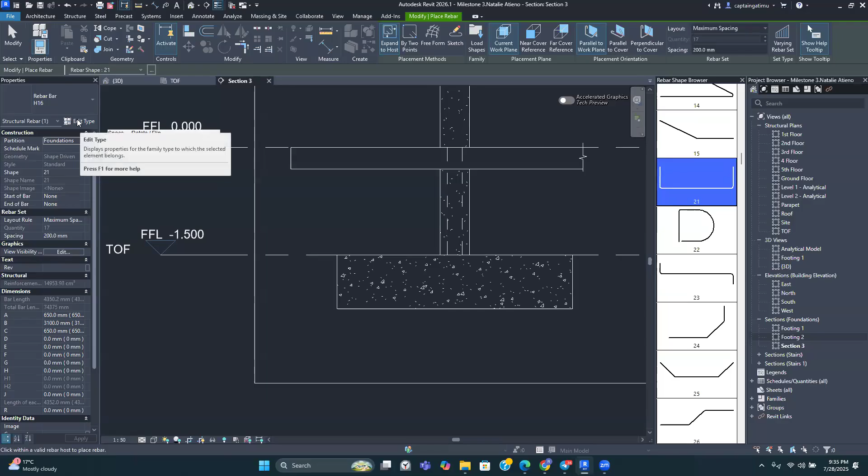At this point, we want a T16, so click on edit type, then duplicate this type and change it to T16. Click OK, click OK again, and you're good to go. You can see your T16 here. Ensure the partition is foundations.

The rebar set is set at maximum spacing, and the spacing is 200 mm. For the comments, I change this to bottom one, we have it there, and click apply. Then all you need to do is click on your footing and you're good to go.

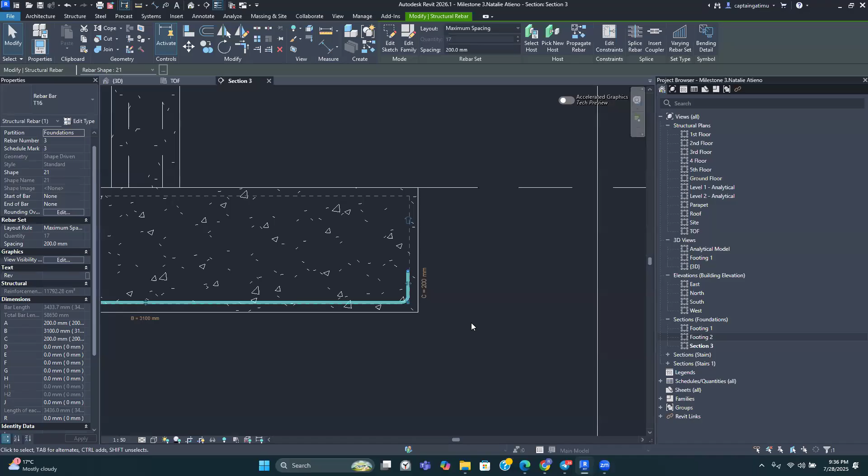At this point, I'll just select this, change this to 200, and also change this side to 200, and you are good to go. Then after that, you can create the bottom two bars. So you go back to rebar and select shape number 21.

Since we want it to run perpendicular to this bar, we select perpendicular to cover. After doing that, ensure the comments are under bottom two, and place them there. Then select them and place them at the top.

With the bars selected, go to properties, change the A to match what you had for the bottom one bar, and the C to match the same. That's all you need to do. At this point, you have modeled the bottom one and bottom two bars. That's easy.

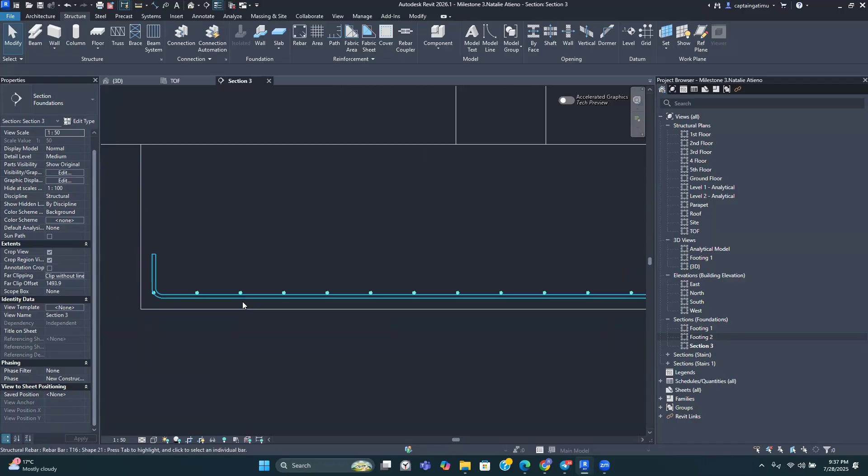To create the top one and top two bars, select these two bars and mirror them using the mirror draw axis. Click on mirror draw axis, left click on this symbol, then scroll down until you get the triangular icon, which shows the midpoint of that footing. Left click and draw your line there. Or if you're having trouble finding this icon, just type SM for midpoint, then left click and draw a short horizontal line.

And you're going to have your top one bars modeled. After mirroring, select the topmost bar, scroll down and change the comments to top one. Type top one and click apply, and you're good to go.

Then select the second top bar, go to identity data, change the comments to top 2, and you're good to go. That's how easy it is to do.

Please ensure you rename it before we forget—always ensure you rename it. So this is going to be footing number 3. All right, so we have that.

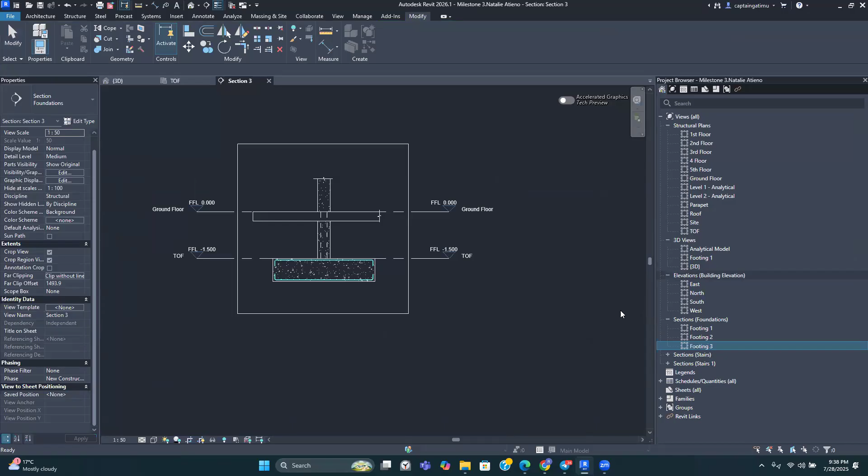I want to show you something cool before we proceed to modeling the rebar for the combined footing. Someone may be wondering, do you need to model the rebars for all the footings? You do not need to do that. Revit is a really smart software—you can propagate rebar from one element to another, provided they have the same cross section. Remember, it's expanding to host. For that to work correctly, all you need to do is model rebar for one section, like this small footing 1 here, and then propagate this rebar to the other smaller footings.

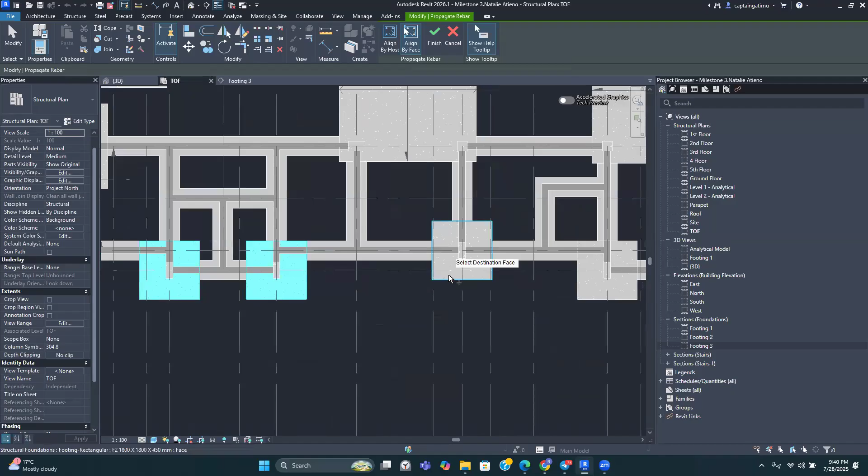Select one rebar—zoom in, select one of the rebars, left click, then right click, select all rebar in host. It's going to select all the rebar in this particular host. Then go to propagate rebar in the contextual ribbon, and just align by face. Select this face, and then proceed to select the footings with similar cross sections, clicking on the faces of the footings with similar cross sections.

You can only do this properly for elements with the same cross sections. You can do it for elements with different cross sections, but it's not going to work perfectly, so to avoid errors, just do this for footings with the same cross section. After you've selected the members you need, click finish and you're good to go. If you go to these other footings now, you can see the rebars have been modeled.

Just to repeat that: we want to propagate the rebar in this particular footing. Left click on one of the rebars, then right click and select all rebar in host—it's going to select all the rebar in this host. Then go to propagate rebar, and for now work with align by face, so left click on align by face. After that, you'll be prompted to select the face.

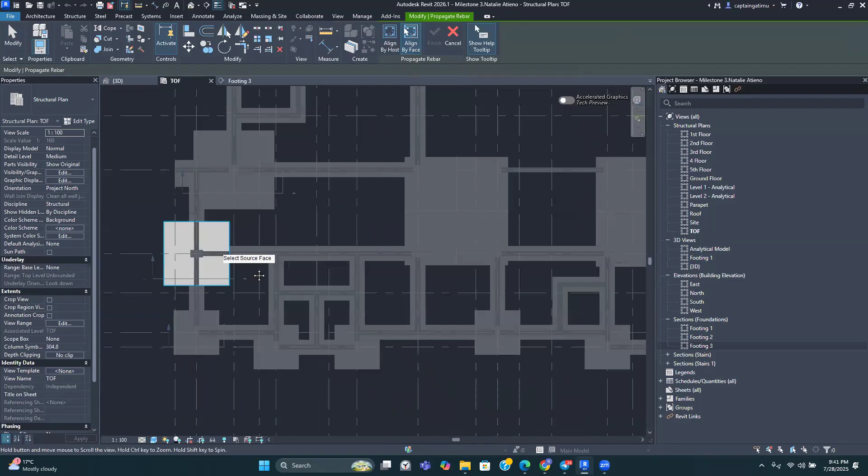Select the face of the footing that you're copying rebar from—select this face. Then select the faces of the footing twos, and you're good to go. That's how easy it is to do.

And for the footing threes, you can do the same, but there's no need for me to repeat that. So this is what I want you to do. I hope you're grasping the most important thing at this point, which is to grasp the concept of how to do it. Then you're going to follow the shorter videos provided to do the others. So I'll do this combined footing, and then you'll proceed to do the others with the help of the shorter videos.

So this is what I want you to do. At this point, you want to model rebar for these footings over here. But there's a catch here. There is a catch when it comes to modeling rebar for such an element.

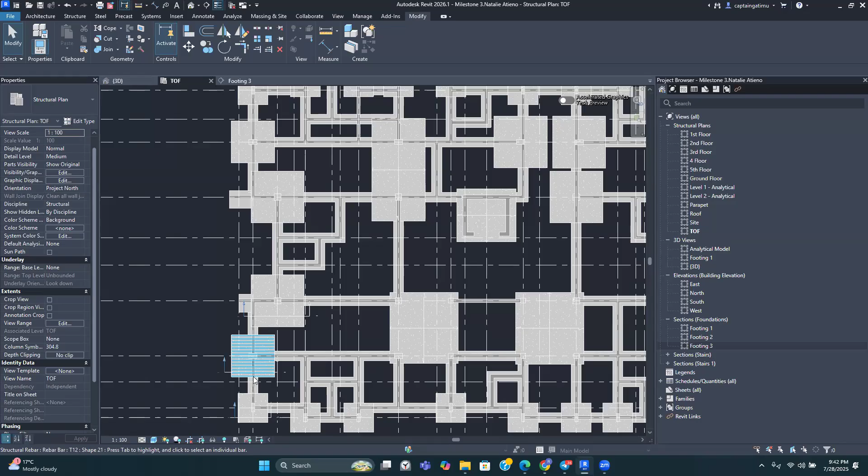All the rebars we modeled before were for square footings, so it did not matter whether we observed the shorter direction or the longer direction. But in design, the shorter span and the longer span have an effect on how moments are distributed, and that also has an effect on how the bars should be laid and how the element should be detailed.

So the rule of thumb is to always ensure that your main bars are parallel to your shorter direction. The rule of thumb is to always ensure your main bars run parallel to the shorter dimension.

So if you look at this combined footing, it means the main reinforcement should be parallel to this shorter direction over here. This being the shorter direction, it means the main bars should run in this direction. Now we are going to model the bars with that in mind.

So if we want to model the bottom bars at this section, you are going to go to View, Section, and we are going to create our first section running along the short direction. So we are running along the short direction.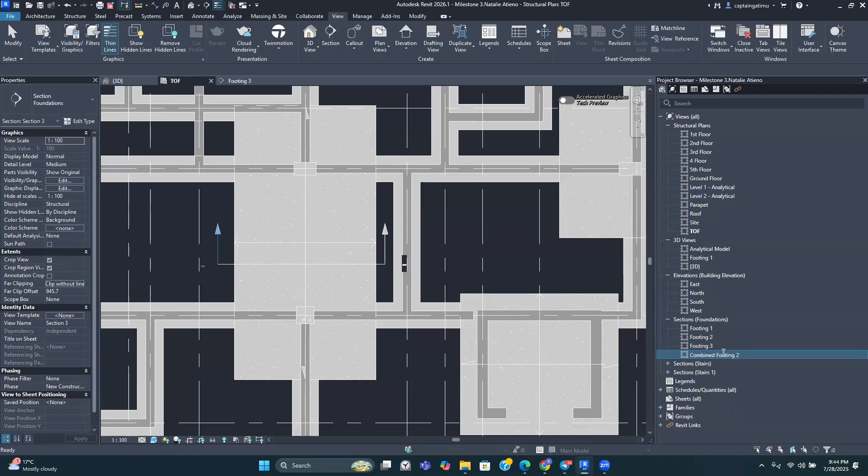After you have that, go to Sections and rename this. According to the details we shared with you, this should be combined footing, combined footing two. Then just click outside and left-click press on it to open it.

After you do that - there was an error, sorry, actually there is no error. So what I should do is move this one backwards so that I can have a column in my view. Always ensure there is a column so that your detail makes sense.

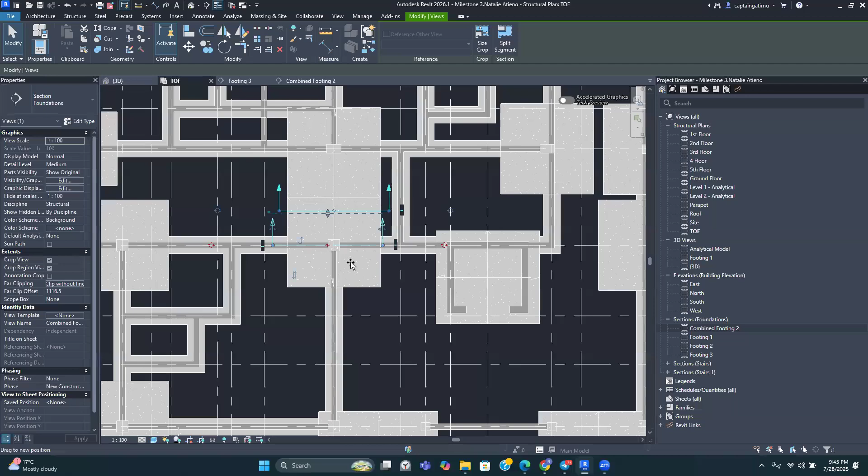Go to your top of foundation, and if you move these about, it affects how much detail can be seen. In this particular section, our detail will not have a column, but if I move this one backwards, it will visualize the detail of this particular column. Then I'm going to change the scale to something friendlier, 1:50.

Then we are going to start cleaning it up as we have done before. So you are going to hide the unnecessary items. I can select the walls, right click, and then hide them in view.

Please remember we are not deleting anything. We are not deleting anything. I cannot overemphasize that. We are not deleting anything, we are just hiding them in view.

So select these items here and the walls and hide them in view, hide them in view by elements. Also hide this strip footing in view by elements, and hide this wall as well by elements, and you are good to go.

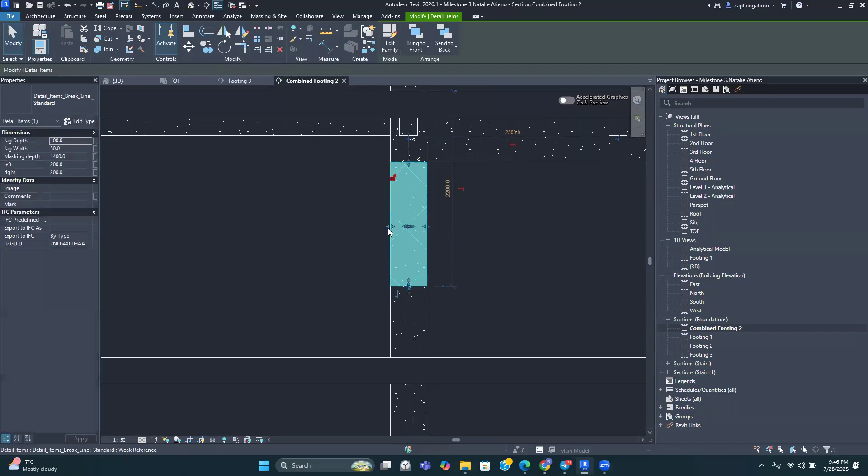Now, after you have that, the next thing to do should be to use the components. So you go to Annotate, Component. You don't need to load it again; once you load it once, you are good to go. You just place it there and click on it to make edits or ensure it fits accordingly. Then go back to Annotate Components.

You just place one, click escape, select it, and ensure it is placed appropriately. Then you can select it, use the mirror pick axis, and mirror it by the center of the column, and you're good to go. After you have that, use these rectangular sections to ensure you only have the details that you need.

So I'll hide this as well, and you're good to go. After you do that, we are going to go to structure. You're going to start with cover. Just click on cover, then click on your footing, then click on this drop down and select the foundations cover. Then just press escape and you're good to go.

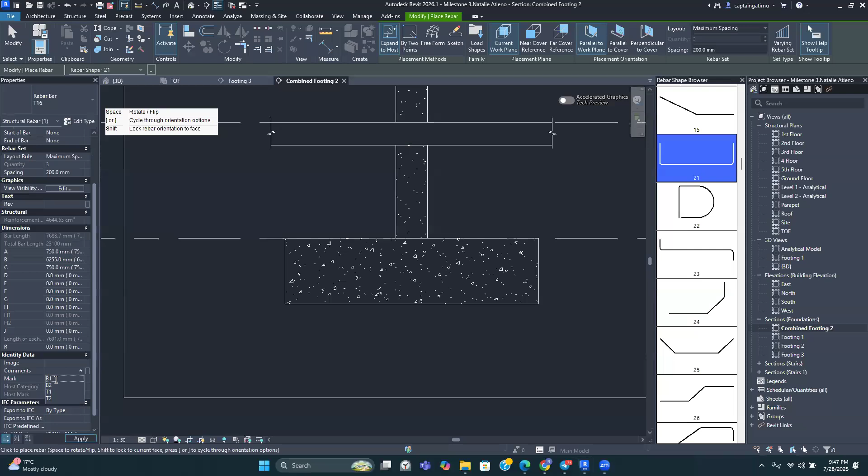So you go to Rebar again. Change this, this is the short direction, and the main reinforcement has to be along this direction, in line with this direction. So you change this to parallel to work plane, select shape number 21, properties T16, partition foundations rebar set, maximum spacing, and then the comments bottom one. Then just click on your footing and it has been modeled there.

Okay, then change these. For this one, we can use 350. And then we are good to go. Then change the same in this direction over here, I change to 350 as well. And you are good to go.

Then now let's model the bottom two bars. I hope it's now easier for you to follow. You just go perpendicular to cover, select shape number 21. Properties is T16, and then the partition is foundations, and the comments are now bottom two. All right, and then after you do that, just click and model them there.

And then after you do this, just select these bars and move them upwards, okay, to have them placed appropriately. And then once they are there, select them, go to the properties tab, change the A value to what you did for the bottom ones. Do the same thing for C as well. Then apply and you are good to go.

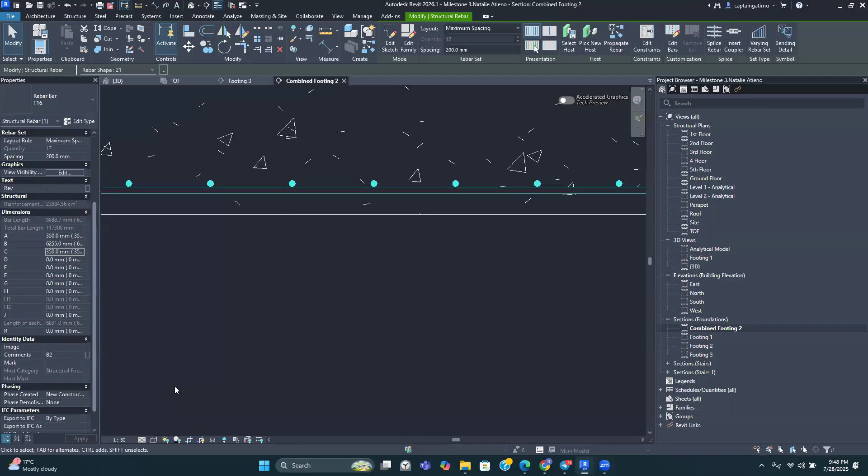Then instead of modeling this manually for the top bars, just select them, select both sets, use the mirror draw axis. And then once you click on mirror draw axis, move your cursor along this edge of the footing until you get this triangular icon over here, which represents the midpoint. Once you have it, left click on it and draw just a short horizontal line, and you have your top bars modeled.

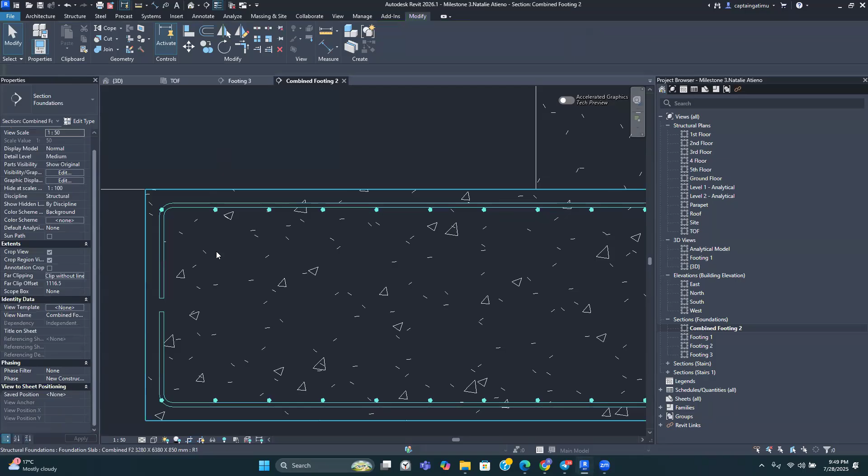Okay, and then after you have that, select the rebar, select the topmost rebar, select it, and change its comment to top one. Then select the second bar from the top, change the comments to top two, and apply, and you are good to go. So that's how easy it is to model rebar for footing in Revit.

Okay, and then if you'd like to see this in 3D, I'll show you something new at this point. So we are going to follow what we did earlier. I'm going to duplicate this, duplicate with detailing. Okay.

So after I do that, I'm going to go to this arrow over here, and I'm going to orient it to a view, section view, and I'm going to select combined footing 2. And it's going to bring my combined footing there. Then after this has been brought, this section box usually has these clips, so you can extend it so that you can see more items.

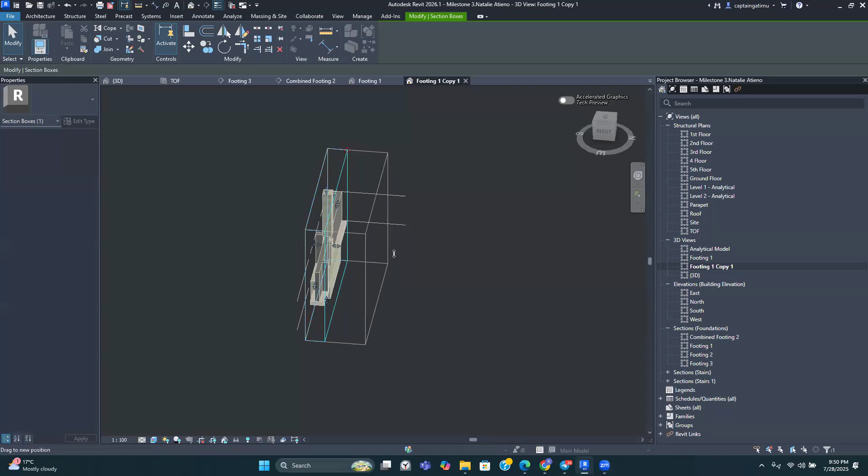So let me see what we are working with. I think it should be around there. Let me see, so just move around, be able to do this correctly. No hurry. And then after you have something of that sort, just select the walls, hide them in view. The walls, you can hide them by category so that you hide most of them. But for the foundations, don't hide them by category.

Just select them, just select them one by one. Select the strip foundations one by one, and then right click, hide them in view by elements. You can also select these two columns here and hide them in view by, sorry, I just closed that. Where was I? Okay, just select them and then right click and hide them in view by elements, and you're good to go.

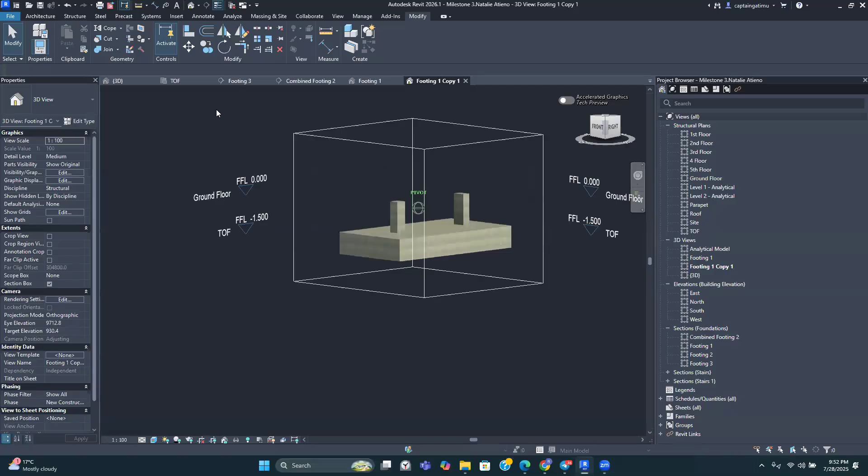Now you have a 3D view that is purposely for this combined footing only. Then at this point, you can select, just place your cursor here, move it around, or use the tab key to cycle through options until one of the rebars has been highlighted. Then once you have rebars highlighted, left click on them, then right click to select all rebar in host.

Okay, so once you select all rebar in host, I want you to go to the properties tab, and then under graphics, click on edit. So under graphics, you have view visibility, click on edit, and then this is what affects the visibility states of your rebar. So we want to view them unobscured. So in this footing one, copy one, just check it and click on OK.

And now you can see your rebars in 3D there. You can see your rebars really, really well. You can see how your detail is coming up even before you go to site. And the beauty of this is you can transfer this to paper and print it as well if you need that extra detail.

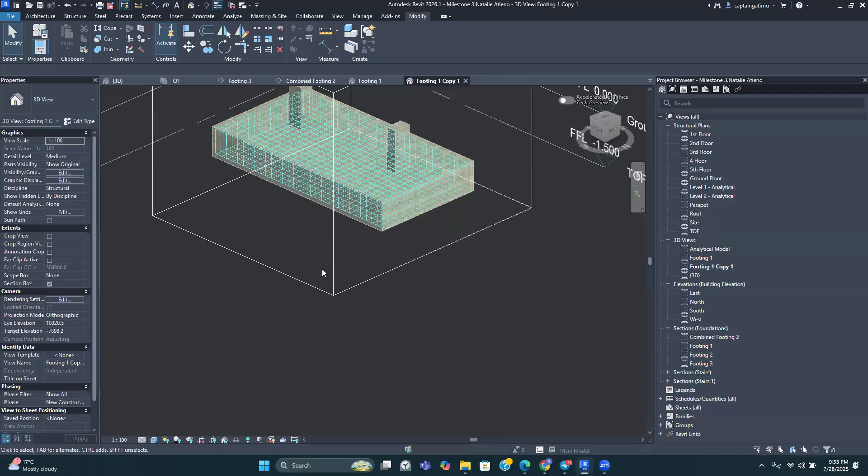You can make this footing a bit more transparent. So you select this footing, right click on it, go to override graphics in view by elements, and then increase its transparency to around 60. Anything above 60 is sufficient enough, and click on OK.

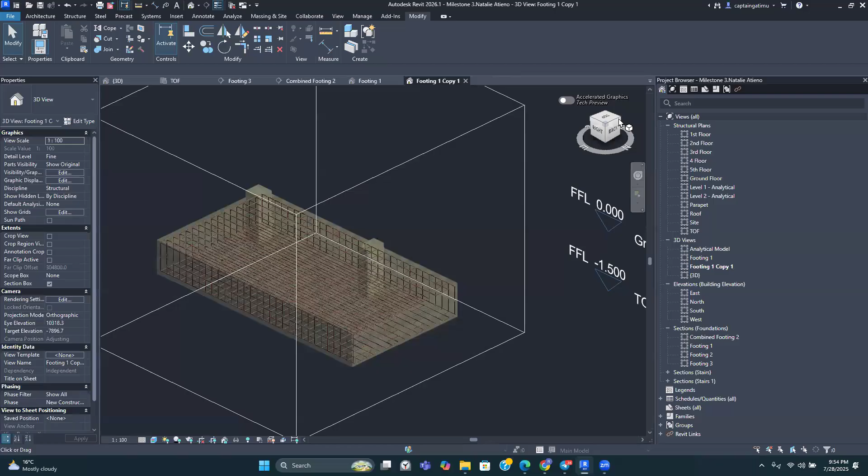That's if you want to view these better. I'll change this to fine. So once it's in fine and detailed, you can now see the rebars pretty well in 3D and how they interact with each other. That's how you do it, and I hope you're going to be able to proceed with it. We are going to issue the deliverable later on, and I hope you're going to be able to work on it.

So that's one of the things I wanted to show you. And then there's one more thing I would want to show you as well. I hope you remember that view depth affects how items are visualized.

If you increase the view depth past this outer edge of the footing, remember these rebars have return legs, or that 90-degree bend on this edge. So if this view depth goes beyond that point, you are going to view those bends. So if at this point you go to the footing 2 detail, or the footing 3, you're going to see these bend details.

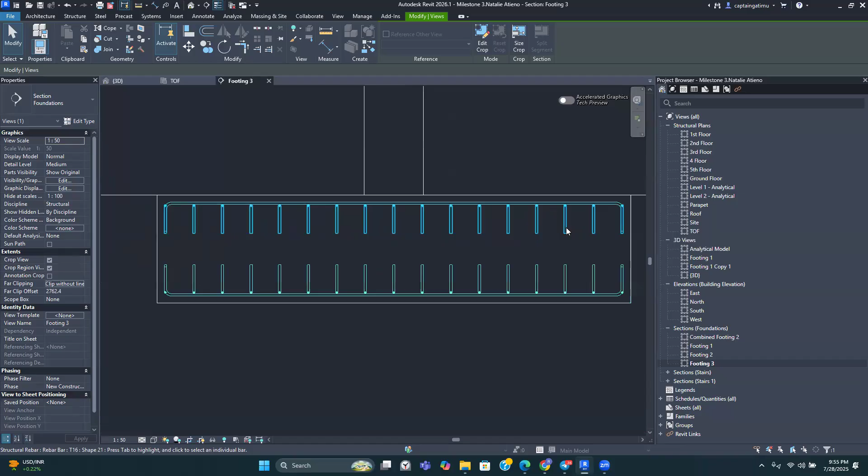It confuses a lot of participants, so I'd like you to at least get a grasp of it. If you find yourself with such a detail where the return legs, where these bends are seen, just go to your top of foundation, select the view depth, select the section, and then reduce the view depth. After you do that, it appears much better. You can just mirror this so that you have a good looking detail there, and that's how you do it.

We are going to issue the deliverable, and this is what I want you to do. I want you to open the combined details that we shared with you. Let me open mine now.

At this point, you've already created the foundation layouts. You know which footing is footing 1, footing 2, footing 3, footing 4, based on their dimensions. You also know the combined footings and the lift core footings based on their dimension. So what I want you to do is to model rebar for those foundations.

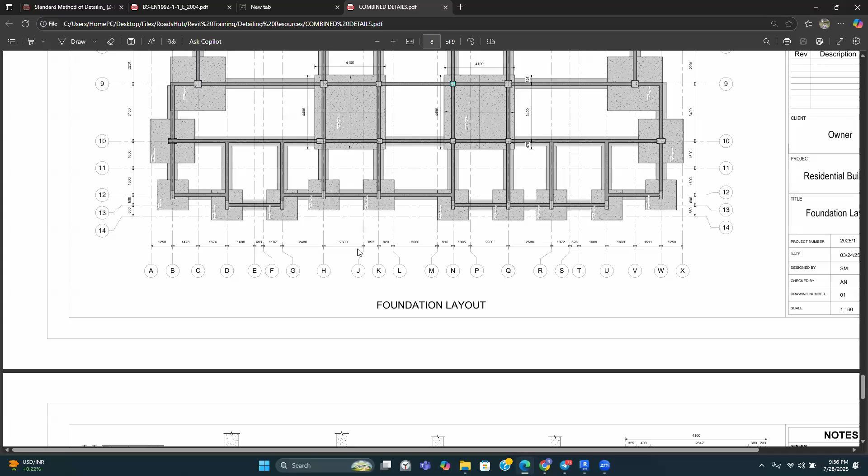You're going to do one for each type. You're going to model rebar for one footing 1, one footing 2, one footing 3, for these combined footings here, and for the lift core footing as well. That's what you're going to do.

This is where you're going to be getting the details. They have been labeled clearly over here, so you can see footing 1. These are the details, it has 10 T12 bars spaced at 200 millimeters. You don't have to constrain yourself with a number, just ensure that the bar diameter is correct and the spacing is correct, as well as the comments. Then do the same for these ones.

For example, you can see the combined footing, so create a section for the combined footing, and you can be able to read them from this section over here. If you have any challenges being able to read this, please reach out to your captains, reach out to us, and we will assist you.